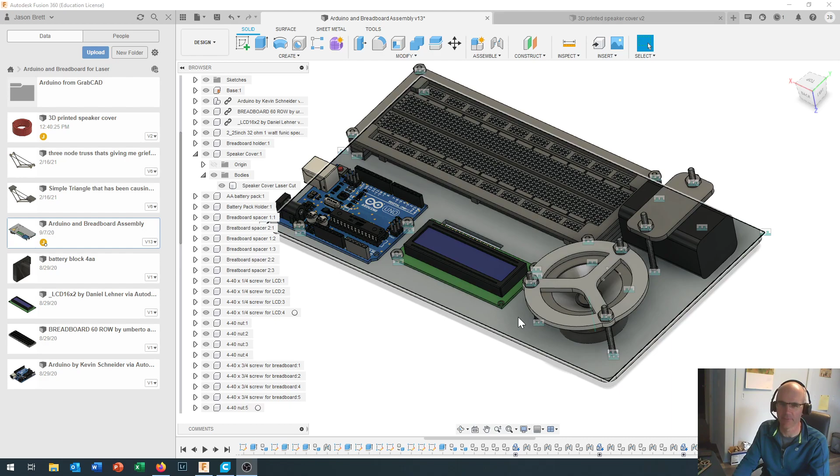And the part we're going to take a look at making today is for our Big Bad Breadboard board. And you can see here that I've got the board all designed in Fusion 360. And right now on your Big Bad Breadboard board, the speaker is held in place by this doohickey right here that I call the speaker cover laser cut. Well, we can turn that part off and then we can come down here and I've designed a 3D printed version that comes down here and surrounds the speaker. So it's going to look a little bit more, here's the real thing right in here.

So you've got a Big Bad Breadboard board and you've been using it for a few things and you can see there's a speaker sitting on it right here. And the speaker actually sounds a lot better if you can enclose that speaker so that you don't get sound reflections bouncing off the bottom of the board and coming back up and interfering with the sound that's supposed to be coming towards your ears.

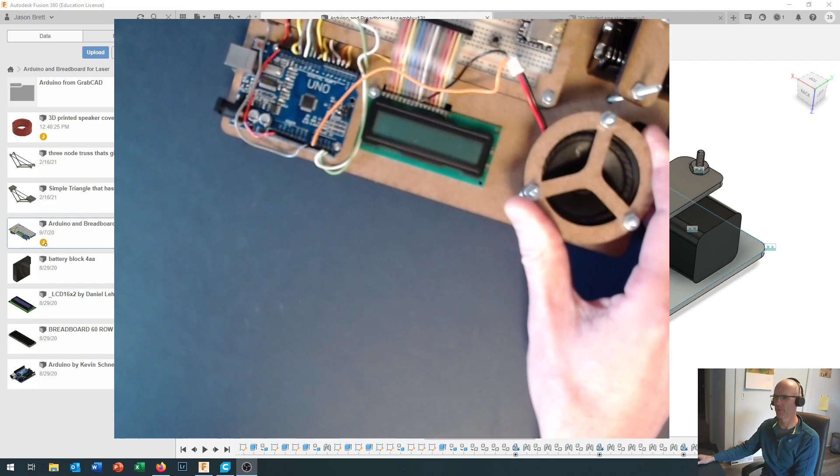So we're going to build a 3D printed part that comes down here and it's going to fit perfectly into our Big Bad Breadboard board, and you're going to replace the laser cut part right here with a nice brightly colored 3D printed part. And in the process, you're going to learn a little bit about modeling a part in Fusion 360 and slicing that part in Ultimaker Cura, two of the software packages that we use pretty regularly at BCIT. Okay, let me turn this back off over here. There we go. So the part's going to come out looking like this red bit right in here.

Before I get into that, I just want to take a moment and talk about some interesting websites that you will be interested in if you're interested in 3D printing. And one of my favorite ones is Shapeways. And not that I do a lot of stuff with Shapeways, but I tend to look to them for inspiration. They've got a really neat business model going on here at Shapeways and sort of a way to think about the impact that 3D printing, or additive manufacturing as it's probably more generally known, is possibly going to have on manufacturing over the next couple of decades.

Because you're able to design parts virtually inside your CAD software, you can have them manufactured and printed anywhere. Doesn't have to be your shop. In fact, you don't have to have a 3D printer in order to do 3D printing. There are companies like Shapeways, many others out there, that have very nice 3D printers, fancier and more expensive than a small startup company would be able to afford for their own. And you can upload your files to them and they will print in a whole range of different materials.

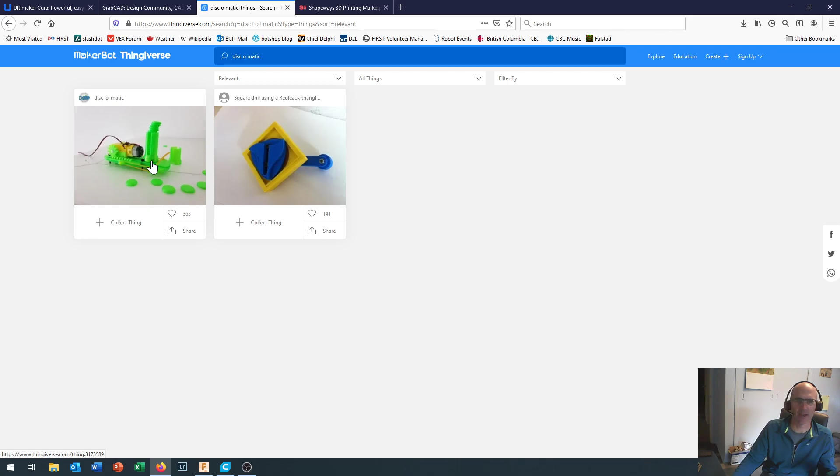So for instance, one of the things that I use on the BoomBot project that we do in second year electronics is a disc cannon, and it's called the Disc-O-Matic. Let's see if that pops up right in here. There we go. And somebody's come and designed the Disc-O-Matic, and they've got pictures of what it looks like. They've mounted it on a little robot, CAD drawings, instructions on how it goes together, and here's all the different files for all the different parts that you need to make that.

So you can come in and you can download the parts, and you can kick that out on your printer. And actually, as I write this, I've got one of these sitting on the Ultimaker in the shop at BCIT right now because I've started to print them out for the second year electronics class. So a couple of neat websites on there. Shapeways, Thingiverse, really cool. You can download things from Thingiverse for free. Just make sure you give people credit. I don't know who Canino is, but I do give him or her credit in my comments, and thank you very much, Canino.

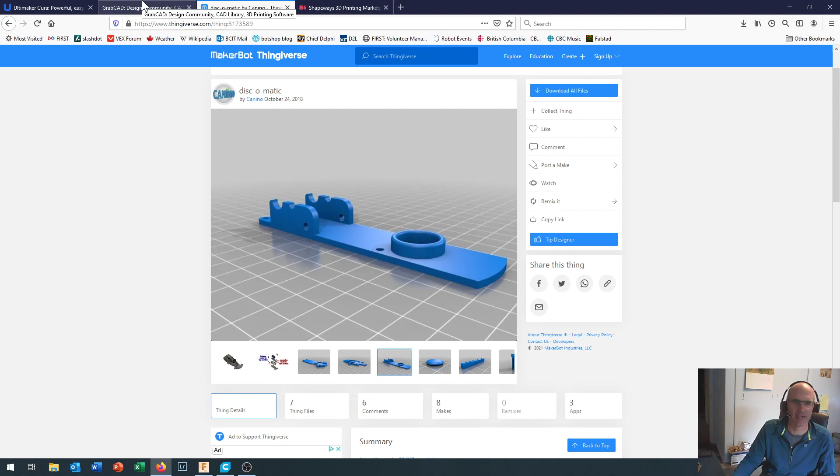And another website I'll just point out along the lines of sharing designs is GrabCAD, because it's got a whole bunch of really nice 3D models available in here. So for instance, if you're interested in doing a 3D model of your Big Bad Breadboard board, and you happen to want an Arduino to drop right in there, you saw I had an Arduino in that design. I have to admit, I did not create that Arduino myself. I came in here and, oh, there's a whole bunch of different Arduino type things. I was looking for an Arduino Uno, and I don't think it was this one that I downloaded and used.

But you can see you can come in here, and again, this is community driven, and everything I've downloaded from here so far has been dimensionally accurate. But people are sharing this, and oh, maybe this was the one that I used. I'd have to go back and look at my files to find out. I usually have the designer's name linked to it, but certainly I didn't go through and design the LCD screen. I did design the battery pack. I did model the speaker, but I downloaded the breadboard and the Arduino from GrabCAD. And if I take a look right in here, there we go. I used the Arduino by Kevin Schneider.

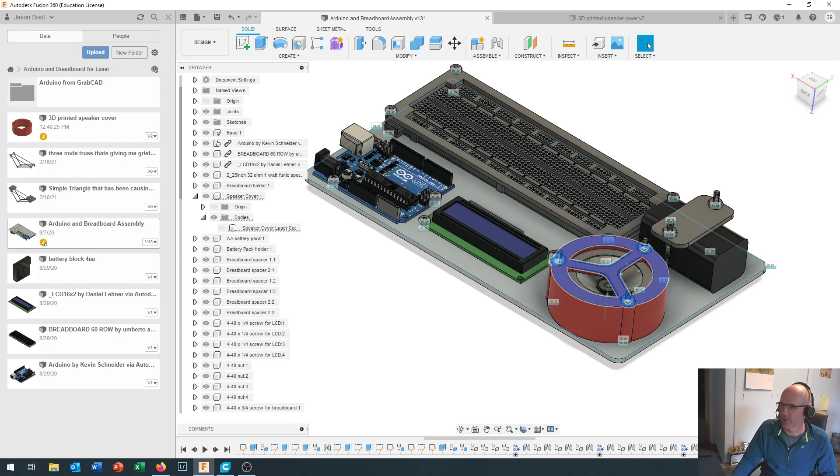All right, let's take a look at what we're going to do to create this design in Fusion 360 and then slice it and print it. Okay, so anytime I go to start a new design, I like to start out with a sketch, and that's not a sketch right there. So at first I made a really quick sketch of what I wanted to create just so that I'd have some dimensions in that handy.

And what I like to say is that when you come into Fusion 360 to make something, yes, it's a drafting tool. Yes, it's a design tool. Yes, once you've got a whole bunch of experience, you can come in here and work in here. But I've been using parametric solid modeling design tools for over a decade now, and I still start with a sketch. And just because that sketch was really ugly, and this presentation is going online, I did come back and do a slightly nicer sketch with my dimensions right in there and used pencil and all that. Probably more detail than I needed to, but I wanted to make sure it was worked out and that I had a reference to start from.

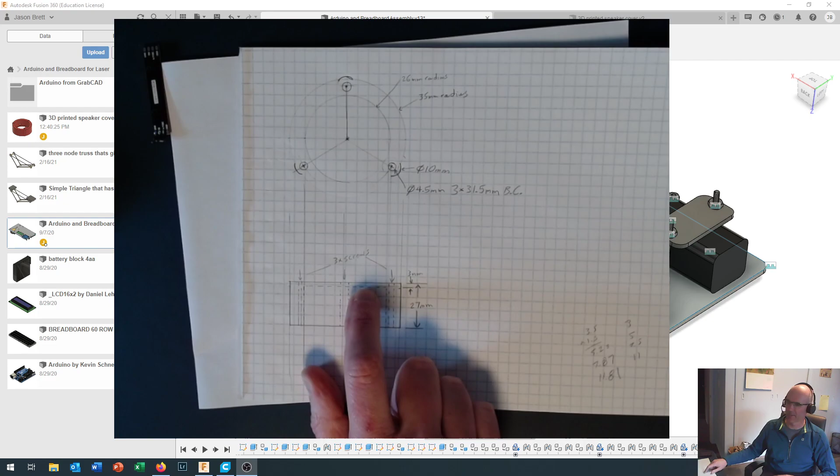You've already kind of seen where we're going, so you've got an idea of what this is going to look like. We're going to have a flat surface on the top right here, and then we're going to extrude it outwards. To keep in with the original design, it's only going to extrude up about 3 millimeters here. We can come back and change that later on. And then it's going to come down a total of 27 millimeters right in there. And that should be just about the right size for fitting our speaker in.

Okay, let's see, where are we going to begin with something like this? So let me turn off that screen. And let's come back to Fusion 360. And I'm just going to switch over here to the speaker cover and make sure I give you a good idea of what we want.

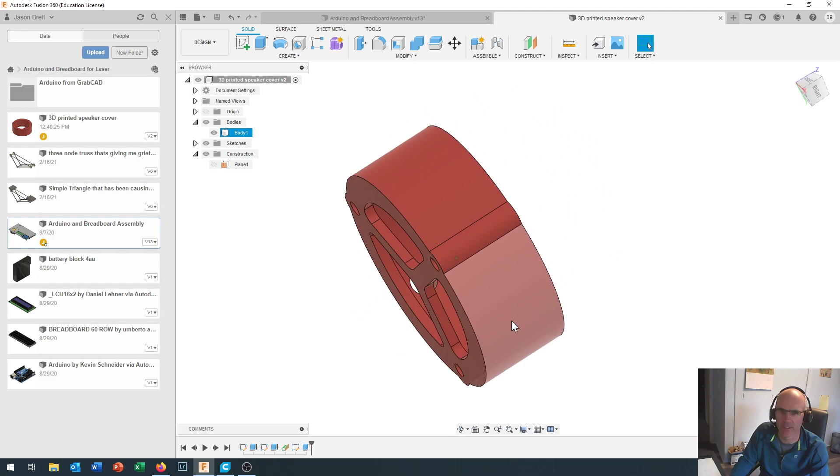Now, when we design this, we've got a few constraints that we have to keep in mind. One, it actually has to be dimensionally accurate, and it has to fit what we're going to make. We've got to have a hole in the side of it for the speaker wires to get out. And then the rest of our Big Bad Breadboard board has 3 holes coming through right like this. And I'm just going to stick pretty much to the laser cut design, but there is room to do a bit of freestyling in here.

Now, when you're thinking about 3D printing, and particularly with our printers that we have in the shop, you have to think about how the printers actually work, because they print with one layer going on top of the other and up higher and higher and higher. So you need to have a relatively large flat surface as your base layer so that you can actually bond to the print plate.

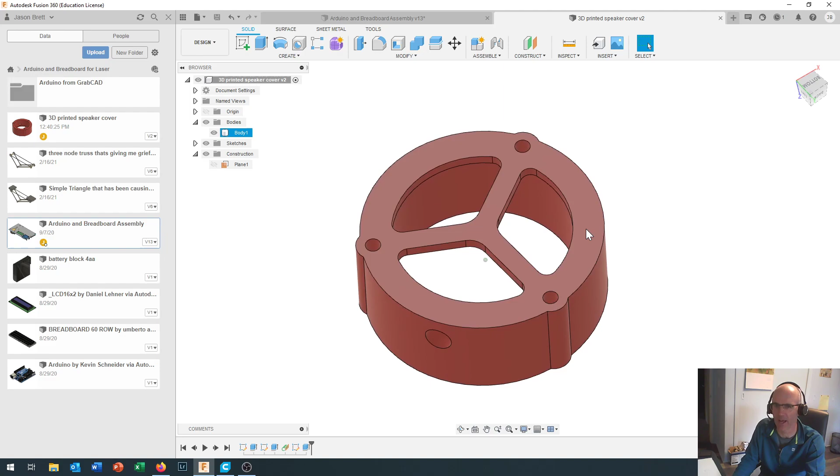Okay, now you've got 2 possible surfaces to have as your flat surface right in here. This could be one right here. So if we keep that flat, then I can print it around this way, and I can start at the bottom and start building up right in here. Or I've got a big flat surface right here, and I could put that surface down and start building up that way. Now the catch is, if I build it up this way, that lets me put all sorts of nice smooth edges and bumps, and I could have a bunch of detail on the top.

But the challenge is going to be these pieces that come into the middle to protect the speaker diaphragm. If I look at that from down below, I'm going to start printing up this way, and this is all going to be hollow in here. And then all of a sudden, I'm going to try to print this face right inside here. And there's going to be no support underneath that. Now, when we get into the 3D printing software, I am going to talk about something called support material, but ideally, we'd like to avoid support material if we can possibly avoid it.

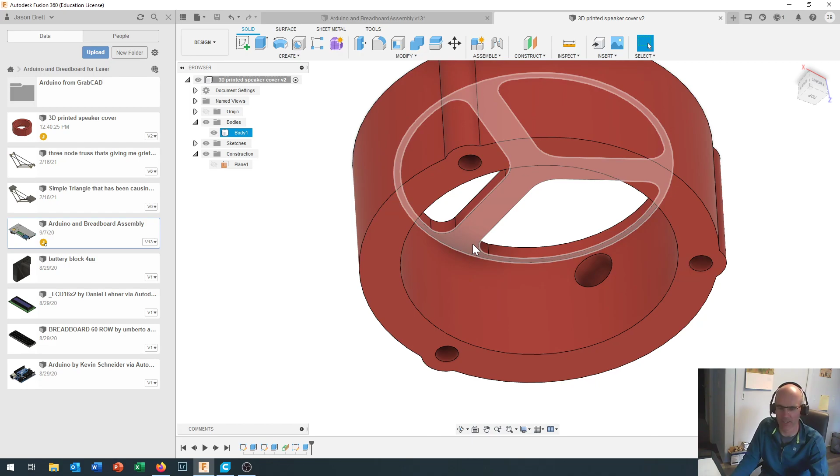So what I'm going to do is I'm going to flip it over, going to put this down this way. This side right here is going to sit right flush on the print bed, and we're going to start building up right around here, and it's going to come out on this side, and it will be beautiful, and it will fit perfectly because we took all our measurements.

Okay, so this is the thing that we're building. The way that we're going to build it is by starting with a sketch on this plane right here to determine the dimensions. Then we are going to extrude that upwards. Okay, now we're only going to extrude it upwards 3 millimeters because we're going to come to that surface right there, and then we're going to use that surface as our reference to extrude the remaining project 24 millimeters to come right up here. Finally, we're going to come back in and we're going to put a hole in the side of it so that our speaker wire can get out.

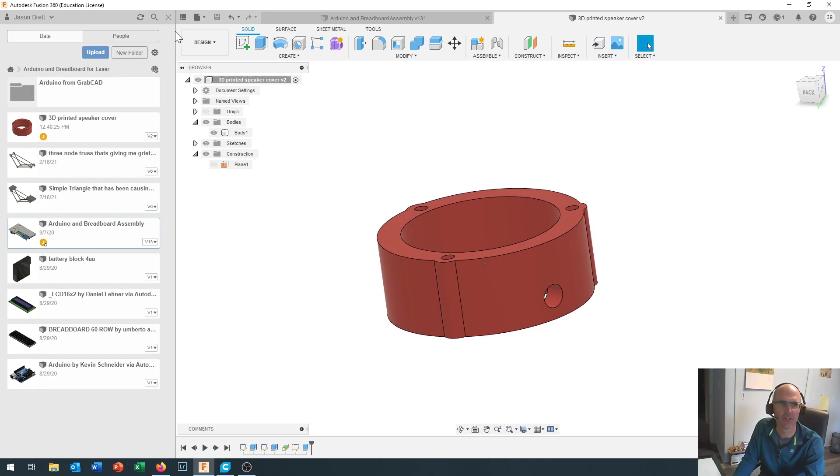Okay, so you've used Fusion 360 a little bit before. This is maybe the first time you're designing a part in it, so I'm going to go through and talk about some of the things as we do that. So you're going to come in here and say, I want a new design. Okay, and you should have a nice blank screen looking something like this.

And along the top, you've got some tools for creating things, modifying things, and later on when we go and put things together for assembling things, but we're not going to need the assemble just yet. A couple of useful tools are Construct. We'll use that for making construction planes because we're working in a 3D space. Not everything is on the X, Y, and Z axis, so sometimes you need to create new axes and planes to serve as reference surfaces.

And then we've got the inspection tools over here, which we can use to take dimensions off something, measure how far apart 2 things are. Lots of useful stuff. And of course, Insert for putting different parts into your drawing. That's how you'd get your GrabCAD materials into your design if you had a multi-part design coming together. We're just going to be creating a single body or a single part or a component, and later on it can go together into the Big Bad Breadboard board, which is an assembly of components.

Okay, you probably don't have all of these files right in here. You might already have some. But let's start out by just saving our file and giving it a name. Let's call it 3D printed speaker cover and then put your name at the end of it. Maybe you don't need a dash in there, okay? Just because if you're sharing the file with me and saying, hey, this isn't working, and you've got your name attached to it, then I know whose file I'm looking at. When you go to 3D print it, you'll want to have your name attached to it as well.

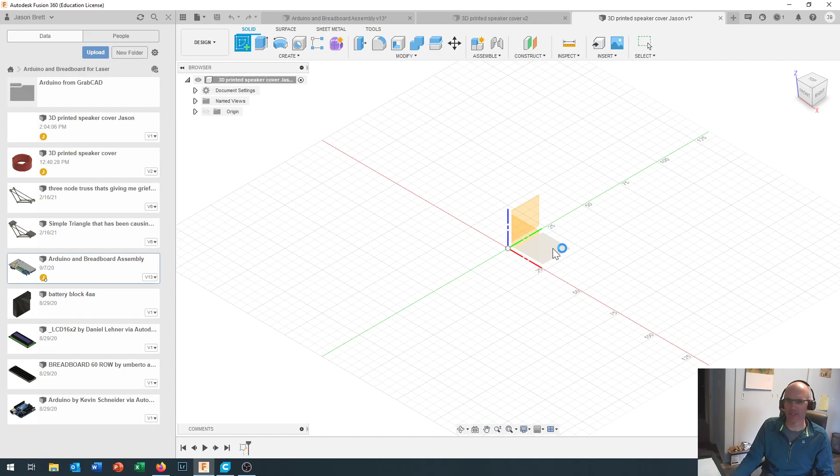But let's start with what we'd call the YX plane down here, okay? Because Z is coming straight up. We're working on the Y and the X. You can see Y is in green and this axis in green. X is in red. This axis is in red over here. And it's got some dimensions worked out right in here.

Now, a couple of things that I should have mentioned before we got going: check in your design when you installed Fusion 360, come up to the top corner, click on here and go to your preferences. And in your preferences, down at the bottom for your default units for your design, just make sure you're working in millimeters. Cura and our 3D printers like to work in millimeters. It's not a big deal if something comes in inches or in centimeters because we can just scale it by a factor of 10 or a factor of 25.4. But anyway, in Fusion, I'll recommend that you set things up in millimeters. And I think that's probably been working for you okay so far.

Weirdly, for our electronics, we're going to work in inches and thousandths of an inch. So yeah, typical Canadian, fluently bilingual in 2 different measurement systems, even though one of those measurement systems is stupid.

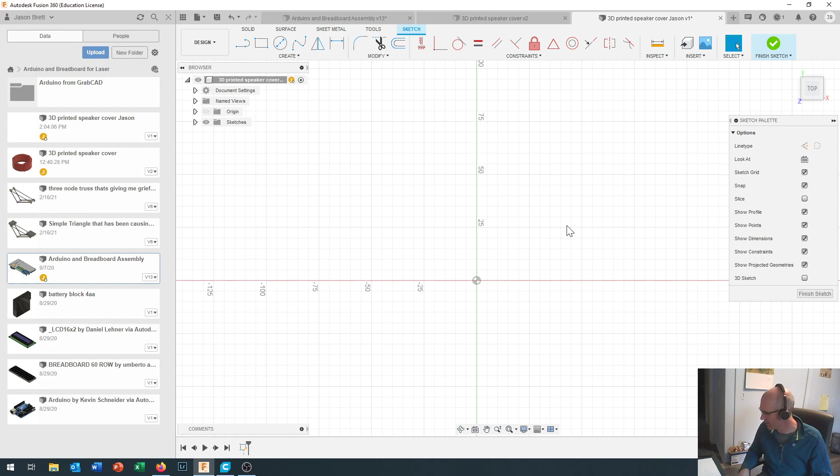Alrighty, let's carry on. We're going to start by taking a look at that sketch that I had laid out, and start with the simplest part of the design, which is going to be the main circle with a 35 millimeter radius. So your circle tool is right up here, and we're going to create a circle. Come down here and just click right on the origin. Doesn't have to be the origin, but it's a nice point of reference. And you can see as we draw that circle out, it's asking us what diameter do you want to make that? So I said it was going to be a 35 millimeter radius. Let's make sure we make that a 70 millimeter diameter circle.

Okay, and it shades it in nice and solid for us. At this point, you may need to zoom in or zoom out.

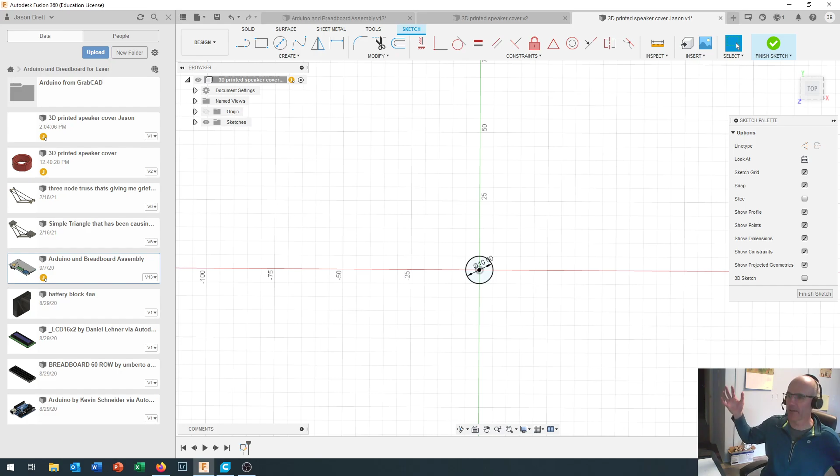Now, this is really cool, very powerful. We've got undo right up here, so let's put that back to 70 where it belongs. Very, very powerful. But part of the challenge when you start designing things in here is that because everything can be changed...

All the parts have to be interlinked to each other using what we call constraints. If you want to get the full benefit of parametric CAD, those parts need to be able to link to each other. Okay, so we've got the outside circle drawn in there. There's going to be a 26 millimeter radius inside circle, which is 52 millimeters in diameter.

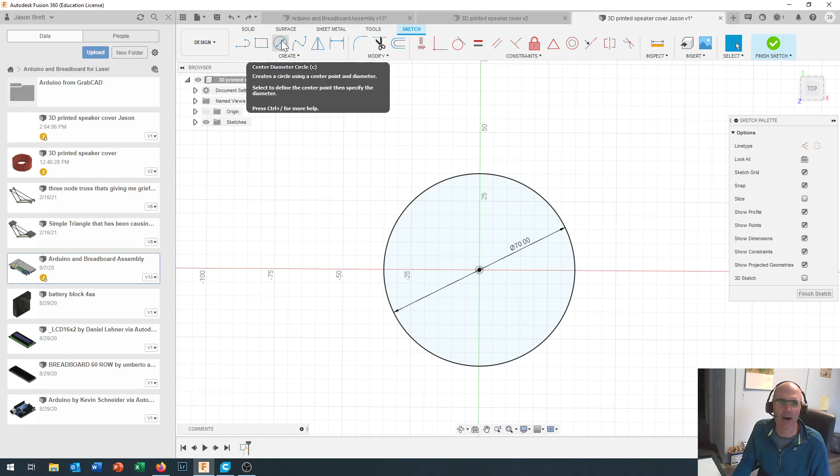Let's create a circle right here, and now you can just type in 52 millimeters in diameter for our inside circle.

Okay, so now you can see that we've got this outside ring coming right along here, and this is laying out the groundwork for our circle. Now we've got 3 bolt holes. One's going to come in right here, one down here, and one over here. Now these spaces are spaced radially and nice and even.

You've probably used a circular array in AutoCAD. We're going to use a similar tool in here. In here, you're going to have to drop down on the menu to find it. They call it a pattern. Okay, but before we can use the pattern, we have to create the parts, and we want to make sure that we've got things in the right position.

So to do that, I'm going to create some construction lines, okay? Everything that we've created so far has been object lines. So now I'm going to come in here and turn on the construction tool, and I'm going to draw a line, starting right at the middle. Make sure that it snaps onto that middle and that it's holding on to the center of that circle.

And then I'm going to come right in here, and you can see I can put it anywhere that I want, but my dimension is highlighted on the side right there. So I am just going to type in that I want those circles to be at a 31.5 millimeter bolt center. So I just go 31.5, okay? And now it puts that dimension in there.

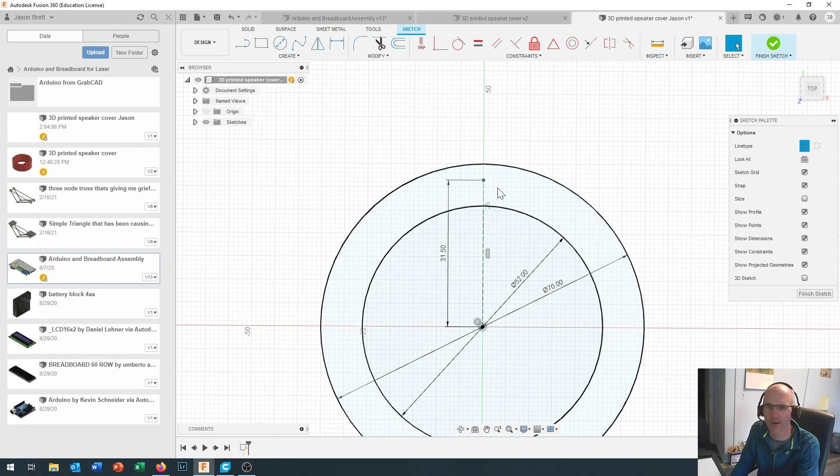Very cool features in there that go through and figure out all the hidden lines and everything for you. All right, so now we've got the location of the center hole for our bolts. I'm going to turn my construction tool off, and I'm going to create a circle. This time I'm going to make sure I snap right onto that center point right there. And it asks, what diameter circle do you want? I want a 4.5 millimeter diameter circle.

Because there's going to be a bolt and a nut over top of that, I want to make sure I've got enough room to support that. I'm going to make that 10 millimeters diameter.

I haven't bothered with any trims or anything just yet. If you're doing this in AutoCAD, you'd be doing all your dimensions at the same time and getting the trim just right. But we're just creating a sketch, so I'm just leaving it like it is.

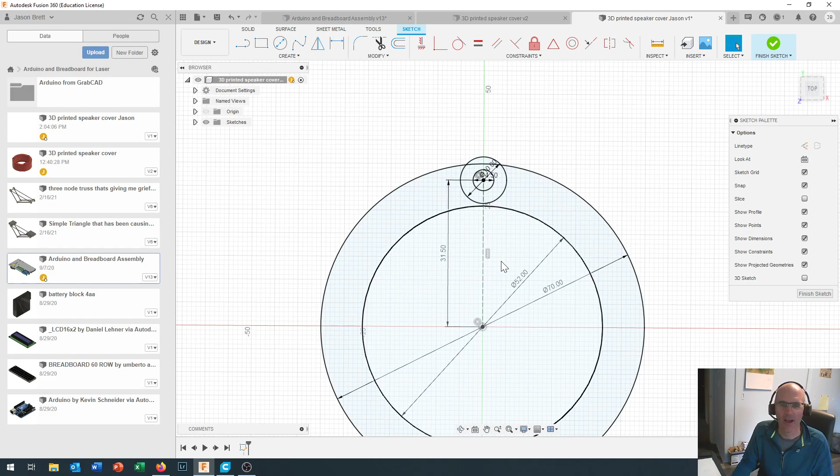Now what I'm going to do is create that circular pattern. You come down here, click on the drop-down menu under Create, and click on Circular Pattern. This gives me a dialog box that tells me to select my objects. So I'm going to select right here, and right here.

Now it's possible that you've clicked on something you didn't mean to. If you clicked on that circle, we don't want that in our pattern, so if you click on it again, that disappears. You can watch up here - it tells you how many objects you've selected. Pretty easy to do.

Once you've selected the objects you want rotated, you need to tell it what it's going to rotate about. Click on Select, and you want them to rotate about there. Beauty, 3 even circles. If you had 4, 5, 6, however many bolt holes you needed, we've got 3, but you can play around with the quantity and it will space them out as you need. Let's just click OK on that.

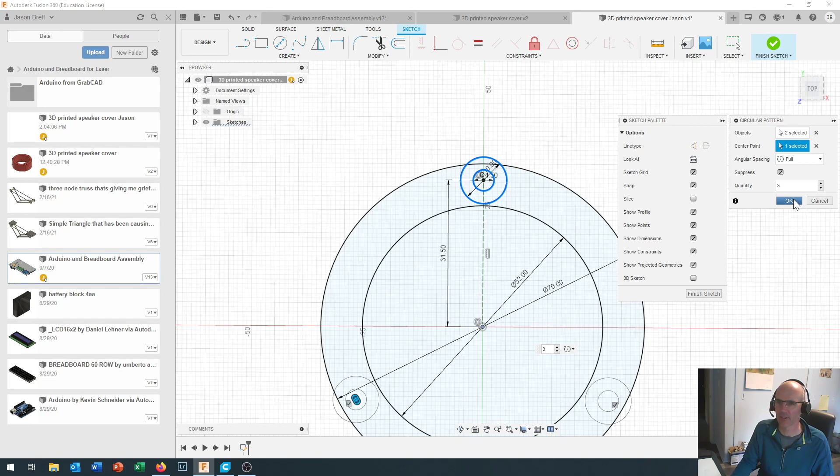And there we go, we've got those in there now. You'll recall from the design that I also had some pieces coming down right in here, sort of a little triangular bit to come out and cover the speaker diaphragm.

Now we can create those a number of different ways, and one of the things I'm going to do is just use the offset tool. Let's come in here - offset is under Modify for some reason, not quite sure why.

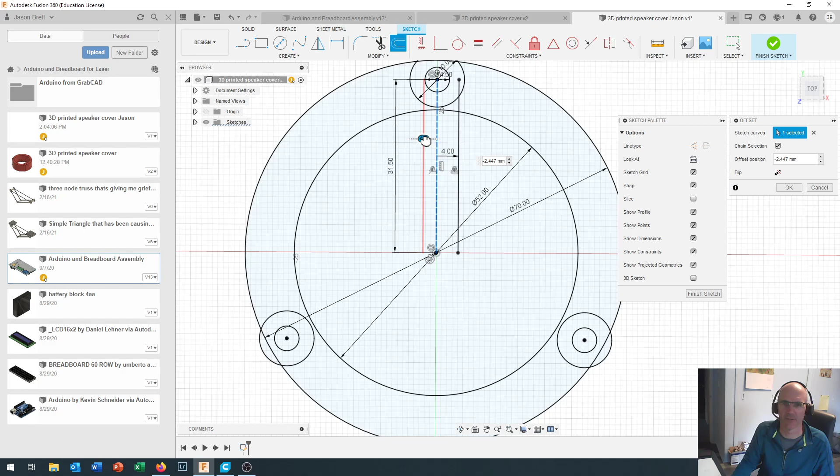I am going to offset the center line and take it off to the side by, I think, 4 millimeters. Then I'll do the offset again. You'll notice the letter O is right next to it - I can just type O to get offset. I'm going to take it in here and drag it off this side, and you can see that changes to a negative because I'm on the opposite side - negative 4 millimeters right there.

Now I've left this sticking out long, but I'm not too worried about that right now because I think you're already familiar with the trim command. So T for trim comes in right here, and I can trim this down - I want to get rid of that bit, that bit, and that bit.

It's giving me little warnings down here saying constraints and dimensions are being removed, but the drawing will still be fine. You can see our constraints actually showing up right in here as little icons - those two bars refer to the parallel constraint right here, and this one refers to a vertical constraint. So we've got these lines constrained to each other.

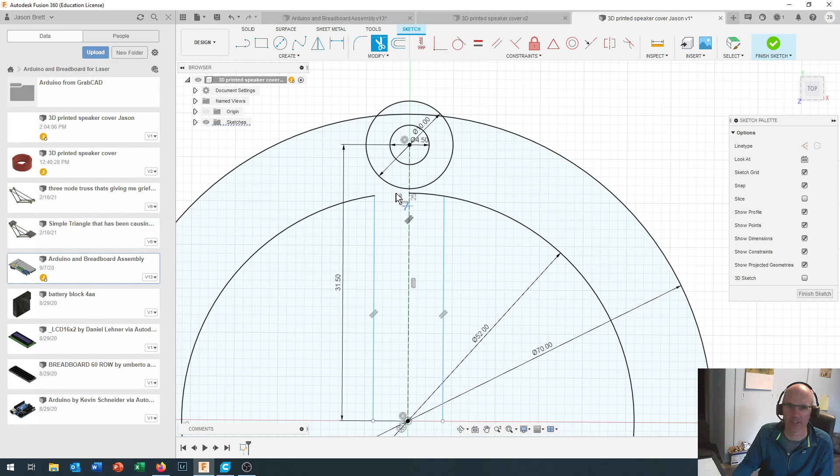As you get into doing more complex drawings, the constraints become more and more important, and I think you'll do a lot more of that when you do your course in parametric solid modeling next year, quite possibly using Inventor, which is a very similar product. Now I just clear those two bits out right there, and after doing all that, I can hit escape to get rid of the trim command.

When I highlight this, you can see I'm highlighting this circle all the way around, and it's got this part coming down here, but nothing joined together in the middle. Well, we want to get 3 of these coming out, and it would be nice if we had nice filleted little corners. So fillet belongs under the modify command.

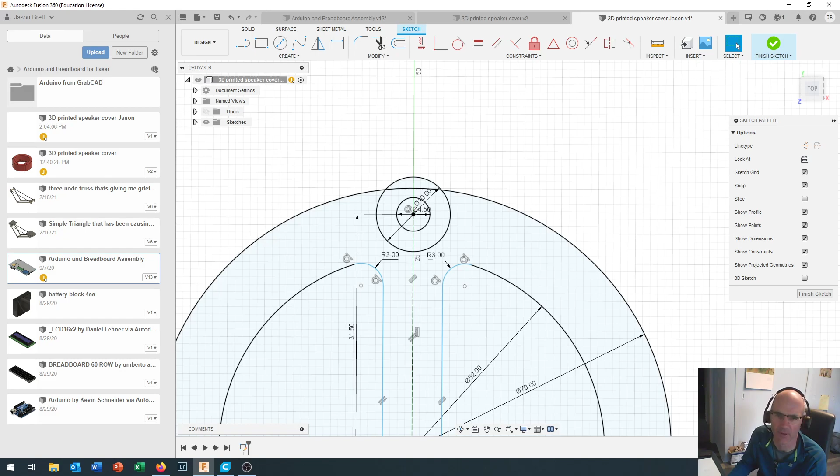You fillet that, and then it asks what radius you want to fillet to. 3 works pretty nice. And then you can fillet this corner right here. Oh, I forgot to select the fillet command - it's like, what do you want me to do? Fillet right there, and 3 millimeters. May as well make it nice and symmetrical.

Okay, now clicking on the middle mouse button allows me to drag that back up onto the screen. Again, you've got tools down here for pan and zoom, and later on we'll use the orbit tool to rotate around and look at things. But right now we're working on the flat here.

Now I'm going to use that circular pattern tool again, and I'm going to create a circular pattern of these parts that I just created. There we go. And it should say 4 selected, okay? Because I've got 2 radiuses and 2 lines.

Okay, now I'm going to select the center point. And there's the center point right there. And it's already got 3 selected. And you can see this all came around and created these lines for me. And those look like they're all in the right place, so we'll hit OK.

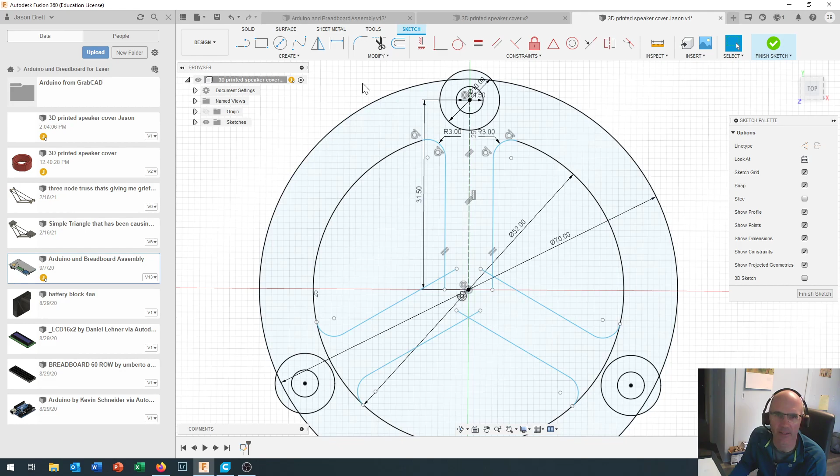Let's come back. We could just leave it there, but let's tidy it up a little bit with some filleting on the middle. And 5 mm looks like a nice fillet there. And fillet. And fillet. There we go, it's looking pretty good.

Okay, and yes, we've got lines overlapping over top of each other. Yes, we've got dimensions everywhere. That's the brilliance of parametric solid modeling. Watch what happens, for instance, if this 52 dimension is wrong.

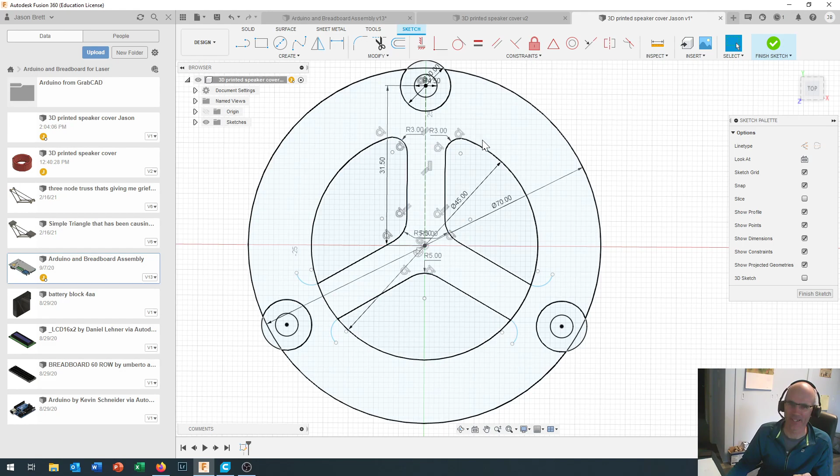Okay, now if I've got my parameters set up right, I should be able to say let's bring that down to 45. And the first one changed, but the second one down here didn't change. Okay, well that makes sense - we'd have to go back and redo our design.

Because the constraints didn't modify over with that. But had we set them all up with the constraints all tied in there and then gone through and added the right constraints, we could take this design and scale it up and down and twist it and make it fit, and it would keep all of the design intent. Design intent's a big word in parametric CAD that we had originally intended for it.

Okay, let's go ahead and turn this into a solid part. We have our sketch all done right now. I'm just using my mouse to move it around and show you that it's nice and flat. It's only two-dimensional right now.

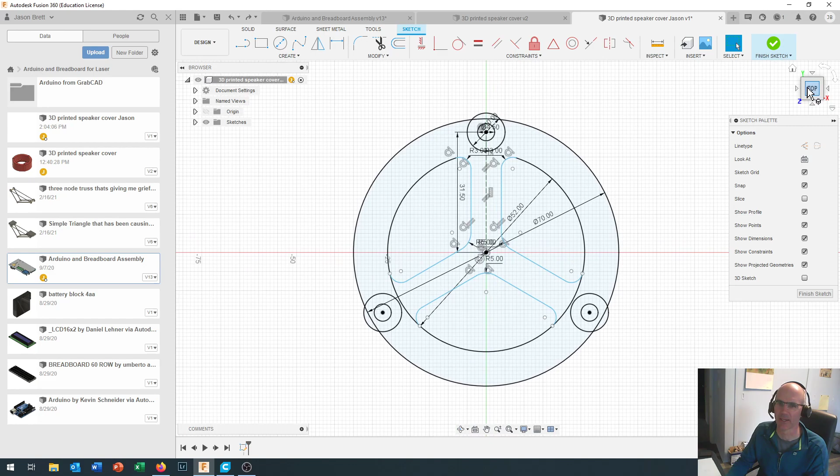Okay, if you wanted to move that around, you can come up here and grab on the box in the top corner and you can pivot that around, or you can just click on one of the planes and take a look at it from a particular plane.

I'm going to click now on Finish Sketch, and then I'm going to come up to the top right here and say I want to take a look at it from this corner right up here. So I just clicked on that corner and it rotated so I had more of an isometric view of what I'm looking at. Now, once you've got a sketch created, the trick to Fusion 360 is then you take that sketch and you extrude it.

And just like squeezing toothpaste out of your toothpaste tube, the extrude function comes in here and says, okay, select your surfaces. So if I select that surface right there - now you have to be careful about which surfaces you select, because if you forget a surface, it's not going to get extruded.

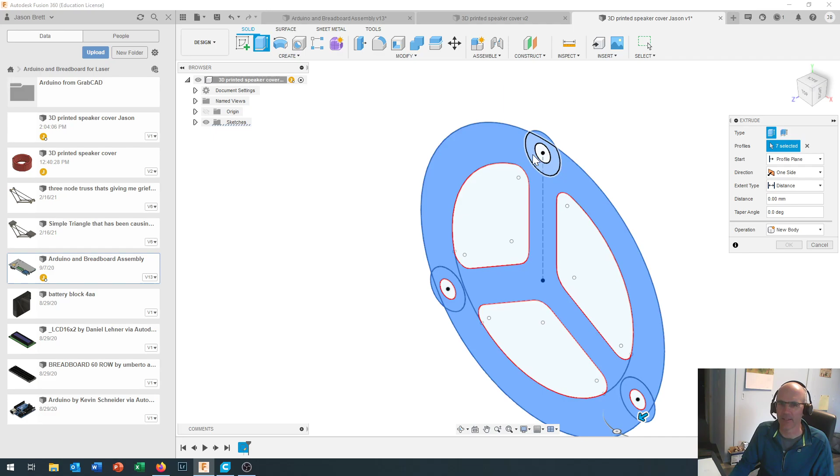Now, you'll see I've intentionally not selected these surfaces right here and this surface right here, because those are going to be holes and they're going to be open. Okay, and so when it looks like that, now we're ready to do an extrude. And this is the part that's going to go up on top of the speaker.

Now, right now I've got it set to 3 mm. Doesn't have to be 3, but 3 should give it sufficient rigidity to hold everything together and to protect the diaphragm. So let's tell it we're going to extrude that by 3 mm. And now you see that extrudes it right out of that plane.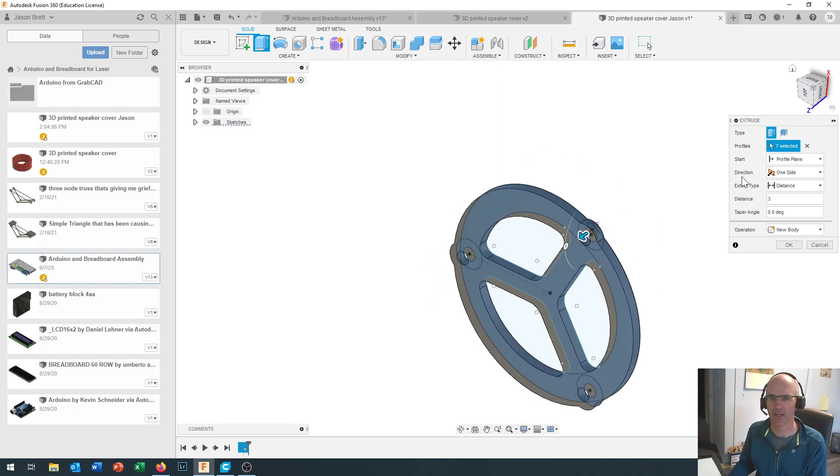And you can come up here on the top and you can rotate around to view it from different points of view. I'm just going to use my mouse to zip it around. Yikes. Turn around the way I want you to go. There we go. And you can see extruding 3 mm out there. And it's going to create that as a new body. And I'm just going to click OK. And there we go. So you've got a nice solid 3D part.

And quite frankly, we could take that right now. We could send it to Cura and slice that up, and we've got a part that we can model with. And the cool thing is, over on this side of the screen, we've got a list of our sketches, and that was drawn up as sketch 1. Okay, that was our original profile. You can click on that, and you can go back and you could edit that sketch.

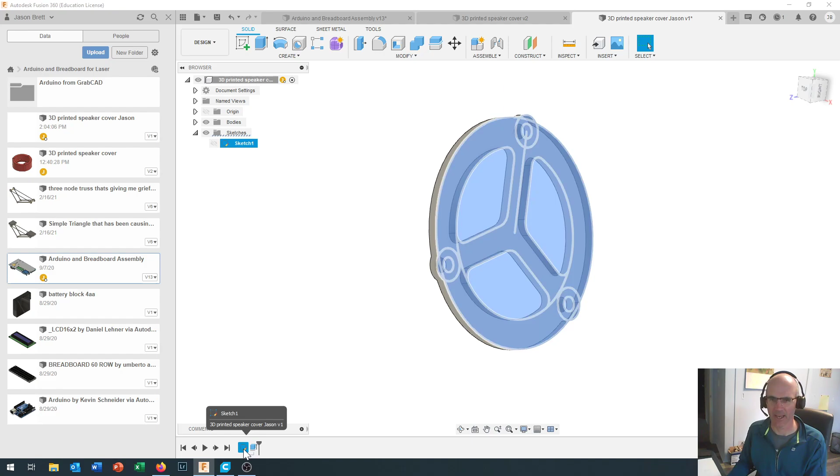And so if I came in and edited that sketch right now, all of the changes that I made when I edited that sketch would be reflected in the extrusion that I just did with it. So you can come back and you can modify all sorts of things. We're not going to do anything like that.

Now we're going to extrude the rest of the drawing. Okay, so the rest of the part, I'm going to create a sketch right here. So this create sketch command, you get very familiar with it in Fusion 360. And instead of selecting one of the existing planes, okay, the X, Y, or Z plane, I'm going to click on this work face right here. And you can see how the work face highlights. And I'm going to build right on top of that.

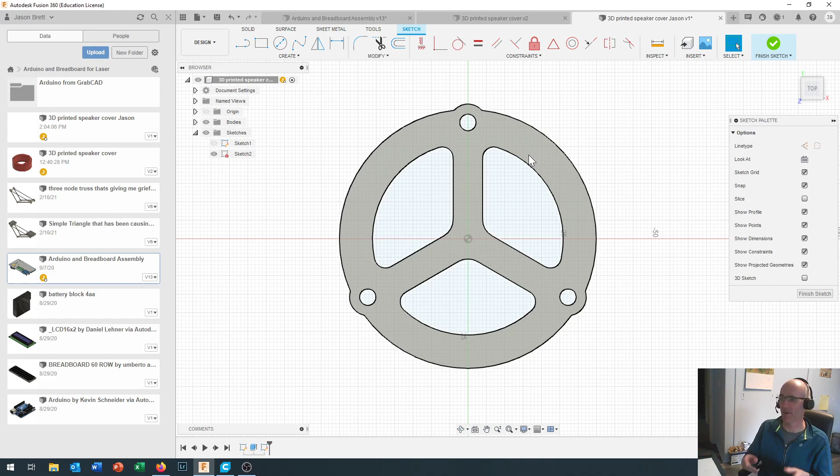Now I'm just going to recenter this on my screen a little bit. Okay, and so I'm working right on top of that surface. So if I extrude out from there, then my new surface will be coming out from that side. Now, I've already done a lot of work to create this the way I want. So what I'm going to do is I'm going to project all of this information onto my new sketch plane. This is a super powerful tool that, after you use it for a while, you can think about all the different neat things that you can do with it.

And what project basically does is it says, I've got a work plane right here, and I've got an object over here, and I want to get the outline of that object as it projects onto that plane. So I take this and I project it right onto there, and it's like it gives me a two-dimensional drawing of this object that kind of exists in the background. And you could choose that for any work plane.

So for instance, if you had an angled work plane, okay, coming in like that, and you want to know how that coffee cup projected onto the work plane right up there, it would project it onto the work plane for you. It's really an amazing and useful tool. So I am going to hit P for project, or you can find it under Create, Project/Include. Okay, we're going to project.

And when I click on there, you see all those lines go red. Now, all of those lines automatically become part of my sketch. And that makes it really easy for me to figure out what I want to do next, because the only other line that I need, I think I'm going to make the part that extrudes be just a little bit thinner in the wall. So I'm going to come out right here and I'm just going to draw a line right on here. Now, I'm not worrying about the dimension.

Okay, just make sure that when you put it in here, that there's no really obvious constraints appearing on it. Just go ahead and click it in right there. And now I'm going to come back and I'm going to do a sketch dimension. I'm going to click on that line. I'm going to click on that line. And it says, where do you want me to put the dimension information? We'll put it right here.

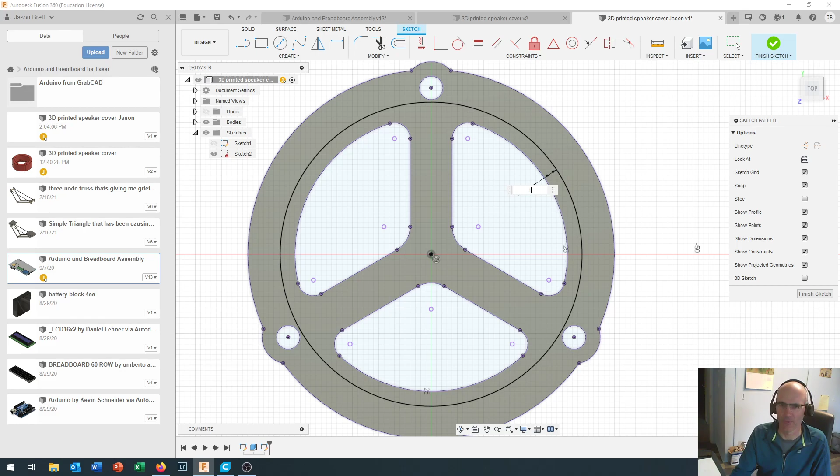And I want that to be 1 millimeter in, just because I can. Okay, just going to space that out just a little bit, make this wall just a little bit thinner, have a little bit of a rim or an edge right on the top right there. Okay, so that is a 1 millimeter gap right in there. You could probably get away with making a 2 millimeter gap.

That's all we have to do for this sketch. We've got all the rest of the information that we need. I'm going to click on Finish Sketch right here. And again, I'll take a look at it from more of a perspective point of view so you can see that the sketch is drawn on this surface right here. When I put my mouse over top of this face, it highlights. So you can see right in there, that face means that I've got one solid continuous face with everything all joined together nicely, which means that's a super candidate for extrude.

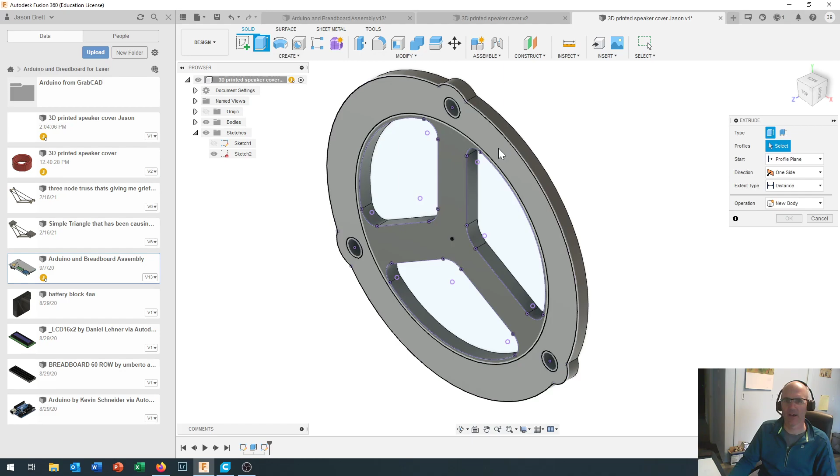Okay, I click on my extrude button and I click on that and I tell it that I want to extrude that a distance of 24 millimeters. And you can see I've got options in here like join and cut and intersection or new body. I'm going to join this to my already existing body. And so now, as I go and do that, there's that little 1 millimeter edge that I left right in there. And you can see that these holes got projected all the way through. Okay, and when you mouse over them, you can see the holes are projected all the way through. And my entire part is looking pretty good.

I can now come in, I can do an inspect. Okay, it's got a measurement tool. I'm going to select this face right here. Then I'm going to rotate around over here to this face right here, and it tells me it's going to be 27 millimeters from top to bottom, which is exactly what I want it to be. Now, it's hard to go wrong when you're going 3 millimeters and 24 millimeters. That better add up to 27.

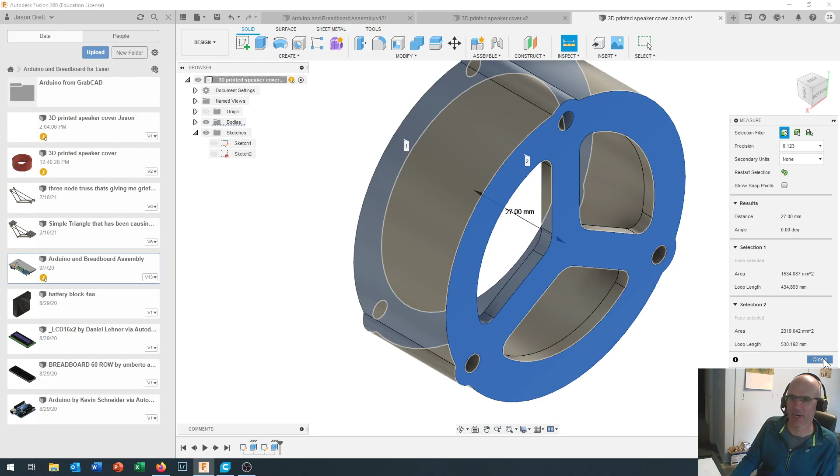But when you're doing more complex drawings and you're trying to check and see, well, what's my spacing between this part and this part? It's a really useful tool to know that that's there for you to measure. And it gives you a lot more information about that too. But anyway, so there we go. We now have a part designed in Fusion 360. Now you can do a couple of other little neat things to it.

For instance, this is going to be a pretty sharp edge right up around the corner. You can actually do a fillet in 3D, and you can come in here and you can click these edges right around here. And sometimes it'll automatically draw the loop for you. Sometimes it won't. There's different options on here on making that. And right in here, we could give it a 1 mm radius just to curve that in a little bit right there. Okay. You'll see when we do our slicing for it that there's a reason I'm not going too much more than 1 mm. But 1 mm around there is not too bad. It just takes any sharp edges off right there.

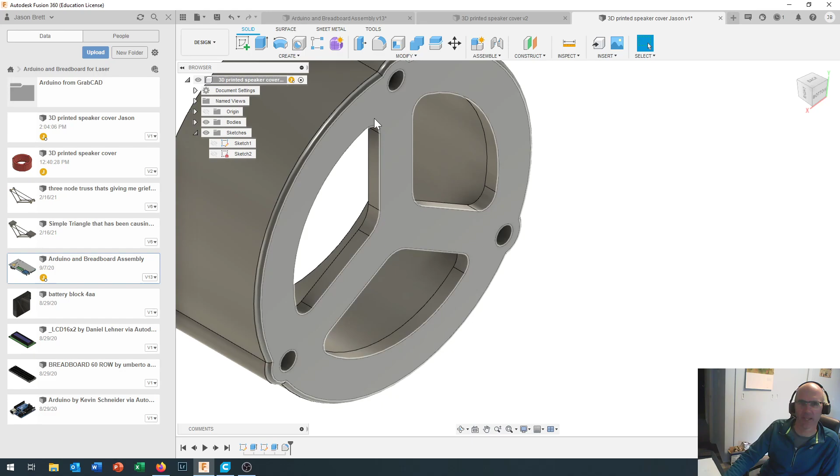In fact, if you wanted, I'll just click OK right now. You could probably come in and put a fillet around this edge running around the inside too. And again, keep it pretty small. 1 mm shouldn't be a problem at all, but that just rounds off that edge a little bit for you nicely.

Okay, so now we've got a part right here and you can rotate through it. You can look at different surfaces. You can click and spin right up there. The orbit command down here also lets you rotate around and see things right in there. And the pan command lets you move things. The look at command is sometimes useful because if you want to look at a particular face, you can click on it like that. Or if you've got a 3D mouse, you just play around and have fun.

We've got one last thing left to do. Okay, this works great. That'll fit beautifully onto our board right like that. The speaker should fit underneath it. We checked the dimensions. They're all good. If you want to double check, you can take measurements with your calipers directly off your Big Bad Breadboard board. But we still need to get a hole for the speaker wire to come out of here.

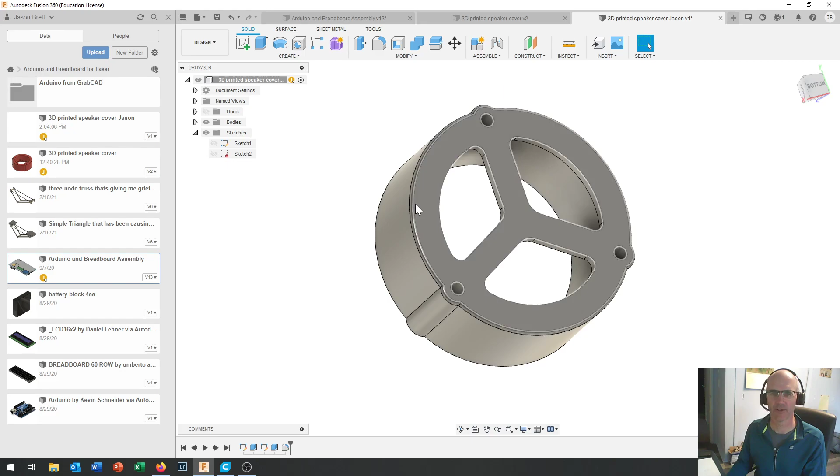And I want to put a hole sort of directly opposite this hole right here, and I want it to be on that face. Now, one of the problems with putting a hole on a rounded face is it's really hard to find reference points, okay? Because if you're going to dimension something, you've got to give it a reference point. And Fusion 360 needs those reference points. You can't just come along and say, put a hole here, okay? Because Fusion 360 will say, put a hole where? And it wants to know exactly where that hole is going to go.

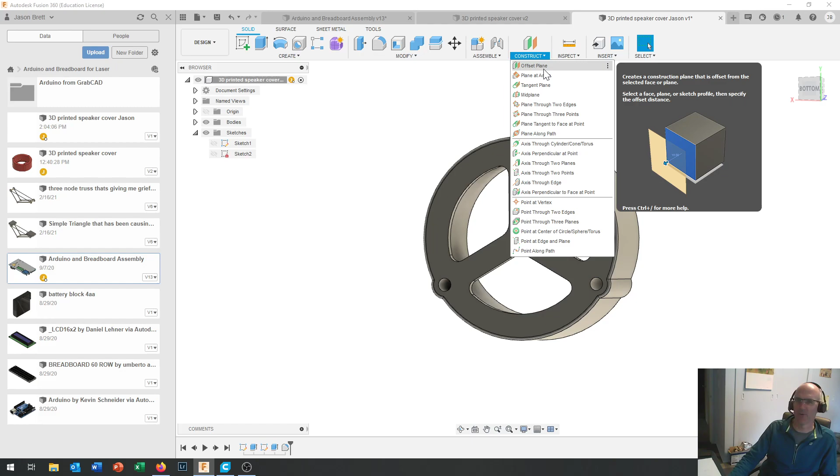So to help it out a little bit, what we're going to do is create a construction plane. Now, as we've been doing all along, we started out using the X, Y, and Z planes to get started. Then we used an existing plane of the first part that we'd created to draw the second part of the object. Well, now we've got all these different options on how we can create planes. And not only can we create planes, but we can create axes and we can create points. The combination of planes, axes, and points, these virtual construction things, allow you to locate parts on your drawing where you want things to happen.

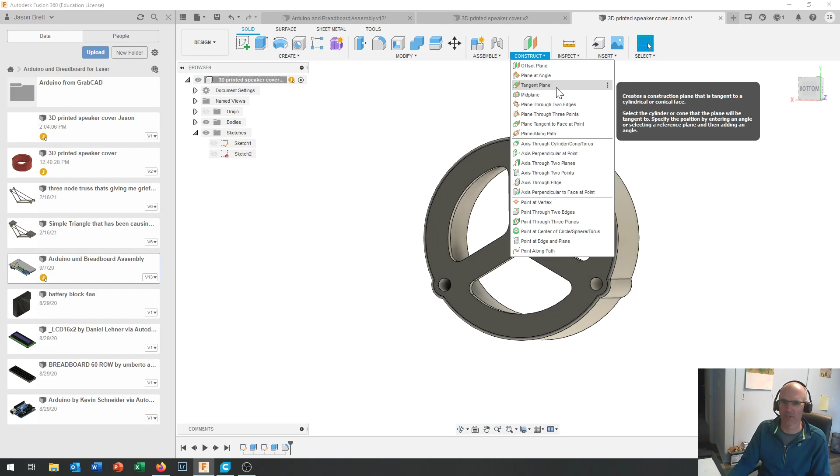Okay, so the most useful one for us right now is we want to create a plane. And because we're working with a cylinder, a tangent plane will be really good. There's a couple of different ways we could go about doing this, but the tangent plane is going to be our most efficient. So we're going to create a tangent plane, and it doesn't really matter which surface I choose to make it tangent on, so long as I pick one of the three surfaces. I'm going to pick this one right here because it's visible right now. And so I select that plane.

Now, you'll see that I've got one face selected. And it's assuming that I want that plane to be vertical, but it also needs a reference plane before it can create that. For a reference plane, I can select any existing plane. So I am going to select for a reference plane this face right down in here. Okay, and this all came up red. It doesn't like that for some reason. It worked beautifully the first time I tried it.

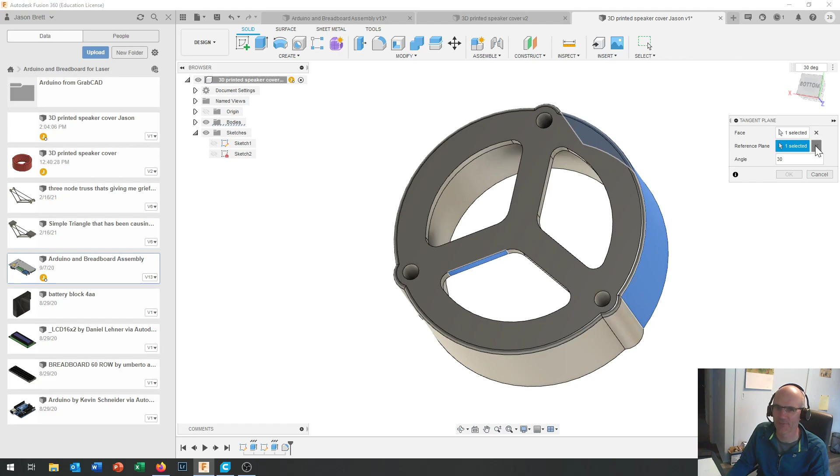Let's try changing how many degrees we're at right in here. Now it's giving me an error, not a problem. Let's take a look and just say, give me a little more info on that. Now it's just saying, that doesn't work at all, you idiot. Okay, so that's all right. Click on X for your reference plane. We don't necessarily need that to be our reference plane right there.

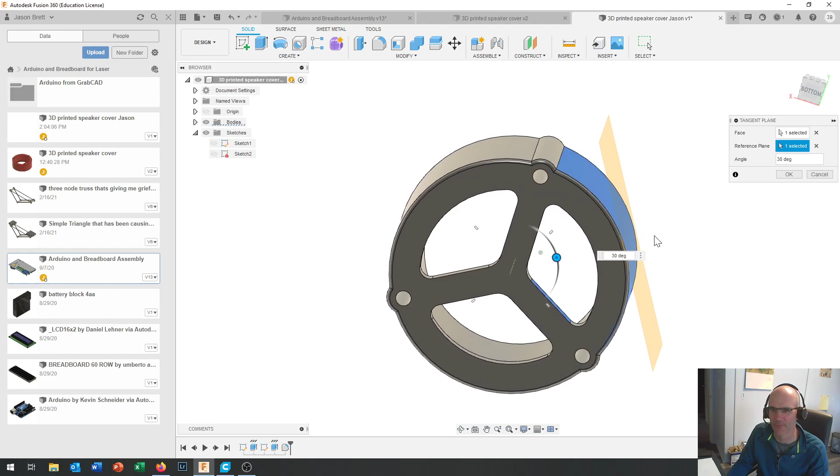And now I'm just like, what plane did I use when I was practicing this drawing so it would all come together nice and easily for you? Did I choose that plane? There we go. It was the plane on the same inside right there. I guess the issue with that one was that if it came right through, it didn't intersect with a tangent. Whereas this one, if I take this plane and come right through there, it will find a tangent point right there. And we give it an angle of 30 degrees. And if we look at that from the top, that's going to come straight through and over to that side. Very nice.

Okay, click OK. Now we've got a reference plane sitting right on here, located on the outside face right here. And it is at a nice straight line that would burrow right through there if we asked it to. We've got a couple different things that we could do. We could create a sketch. We can do all sorts of different things on here.

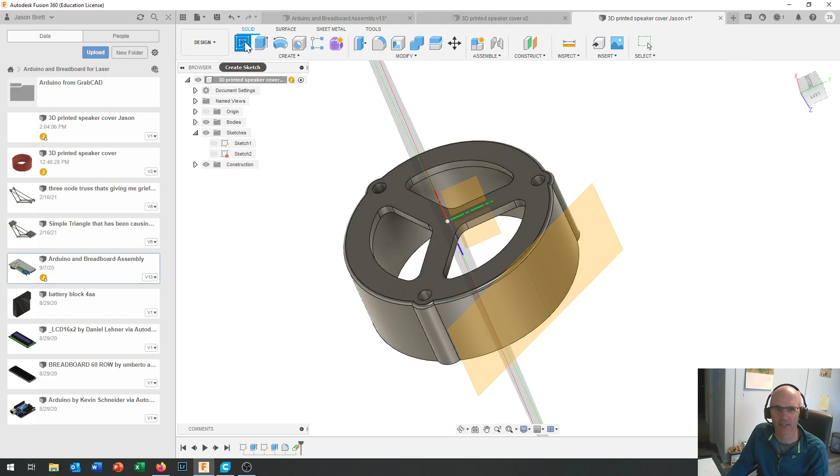There is a hole command that you can use, but we're going to show you how you can use a sketch to create the hole. So I click on Create Sketch, and now I click on this reference plane. This is the new plane that I want to draw on, and it whips the drawing around right like that.

Okay, now keep in mind that there is stuff inside, so we might want to do a projection. We're going to take a projection and just take a look right up here and project this inside surface right here onto that plane. Okay, and now if I go back to looking, oh, I need to look at the exact plane. Okay, I lost my dimensions on here.

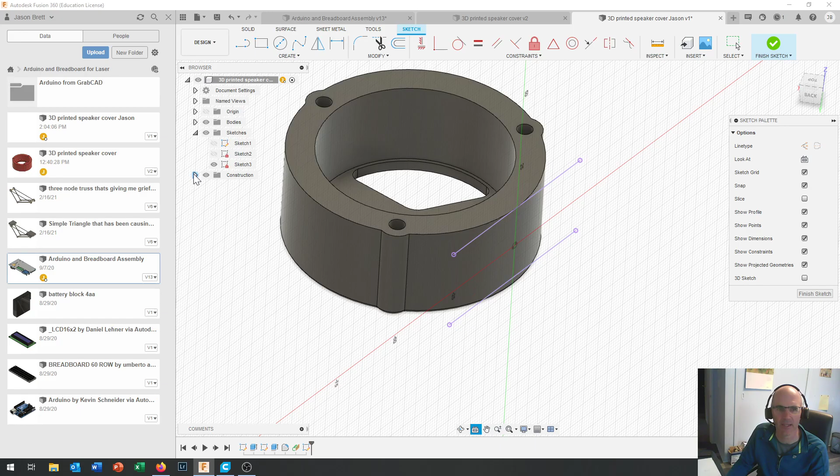Remember I said there was a look at command down right here? You can tell it look at, and if you can't select the plane right there, you can find the planes under the construction heading over here and tell it to look at plane 1. It brings it back into this dimension right here. And now you can see that our projection of the interior dimensions right here includes this line. This is our 3mm gap coming up right here.

Okay, now what we're going to do is create a center diameter circle, and I'm going to put it somewhere up and down on this center axis right here. It needs to be 8mm in diameter for us to fit the little plug from our speaker through. Now, if you want to get fancy, you can measure that out. You could actually make this a rectangular hole coming through on the side because it is a rectangular plug. But for the sake of keeping it simple on today's drawing, let's just make it round.

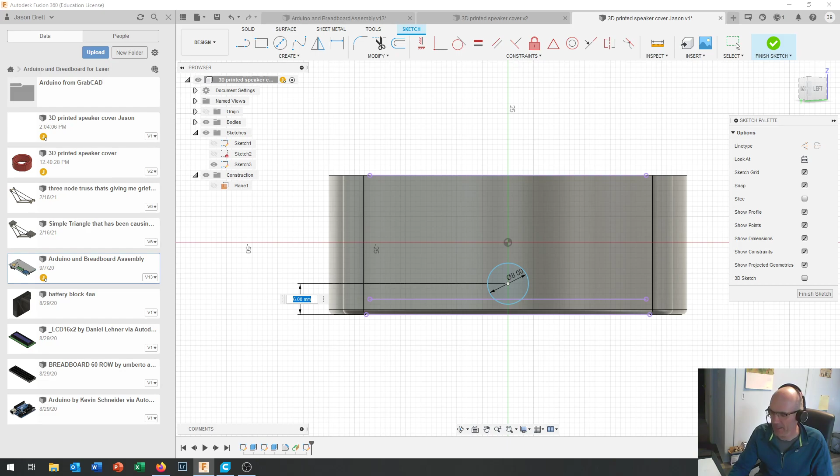And now we have to move that off. You see that intersects right there. I don't like that dimension. We can come in here and apply a dimension to it. So long as it's not otherwise constrained, I can say, well, take the center right there. I clicked on that, and now come down here and click on this edge right here. And it says, where would you like that center to be? And I can say I'd like that to be 8mm up from right there, so it clears that lip right on the inside edge. Okay, so now we've got this hole right here, and I'm going to say finish my sketch.

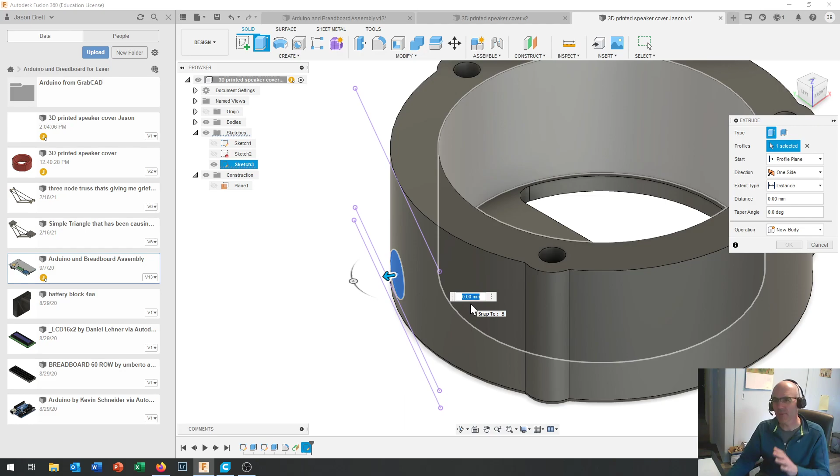Now if I look at that from this corner of the diagram, you can see that this is sitting very, very flat. It's not projected onto this surface. There are tools that allow you to do that, but we don't need to because we're going to do an extrude. Normally when we've done our extrudes, we've extruded in the positive dimension, the equivalent of dragging on that and pulling it out that way. But you can drag on that arrow and pull it back that way, and you can see that as soon as it starts going back inside, in the operation setting right here, I've got new body, I've got join, I come this way, and now all of a sudden it says cut.

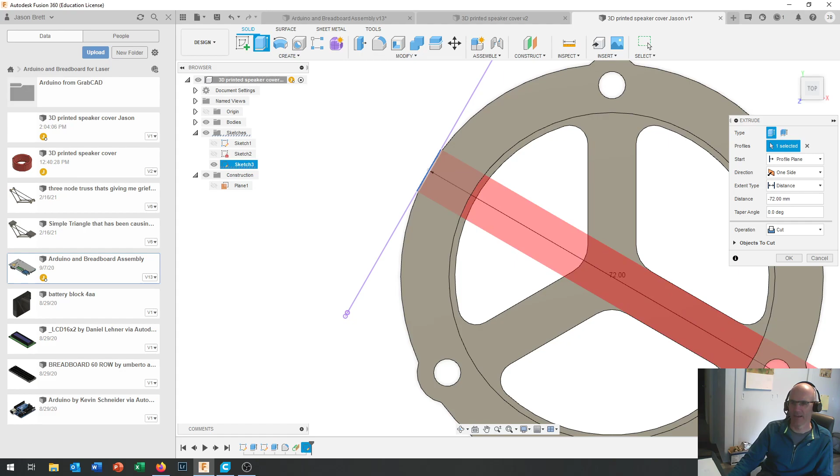And if I go all the way through, let me look at that from the top. Make sure you go all the way through. 11 millimeters should be more than sufficient. If you go too far and come out this side, that hole just keeps projecting all the way through, and you can see that it burrows through on this side of the drawing too. We don't need two holes for our speaker wire to get out, so we're just going to put the one right on here. And oh, it looks like 10 millimeters was enough. The cut option is exactly what we want, and we will say OK.

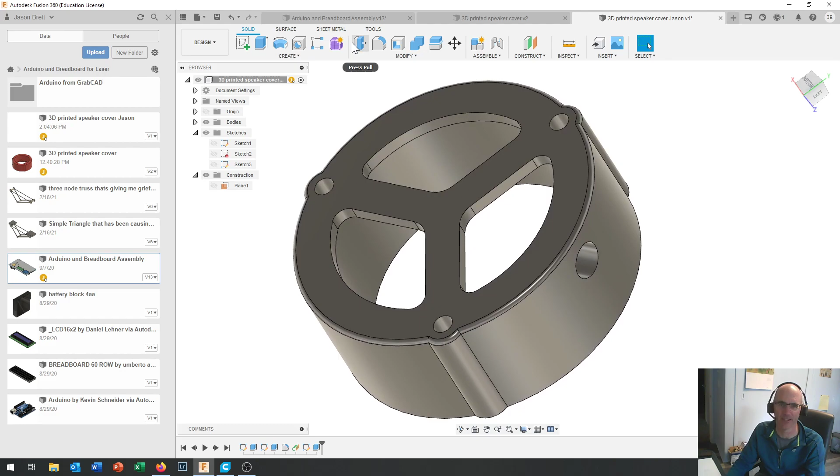And now you've got a hole coming through on that side. As you take a look at it, you can see it from the inside too. So a couple of different ways that you can put things together. Now, since you've got wires coming through the hole, if you want to get fancy and you like using that fillet tool, because I really like filleting and 3D printing is one of the few machining processes where there is no cost to putting a fillet on something.

Okay, so now I selected, what does it say, 3 edges? Thought I'd only selected 2. Let's see what happens when I put a 2 millimeter radius on it. There we go. I've got a nicely filleted hole so that there won't be any rough edges to abrade the wires that come through.

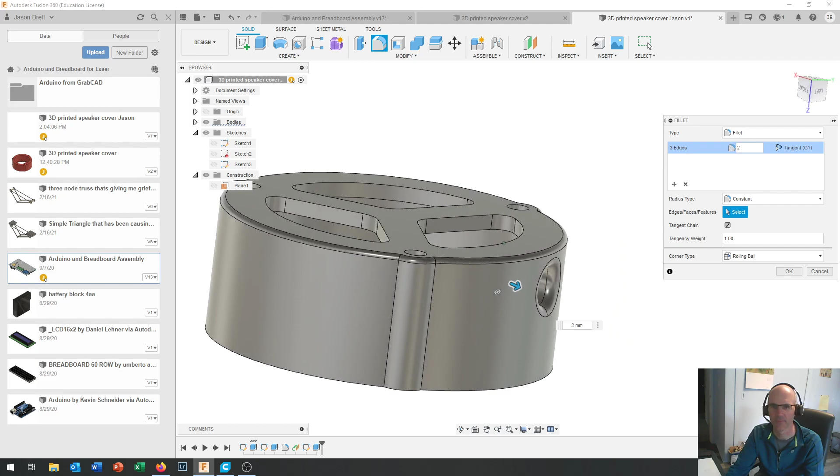Let's just check right up and inside here. Now you can see, oh, maybe 2 millimeters was a bit too much because we only gave a 1 millimeter difference right on there. Let's bring that back down to 1. There we go. Now it meets up nicely with that surface right there.

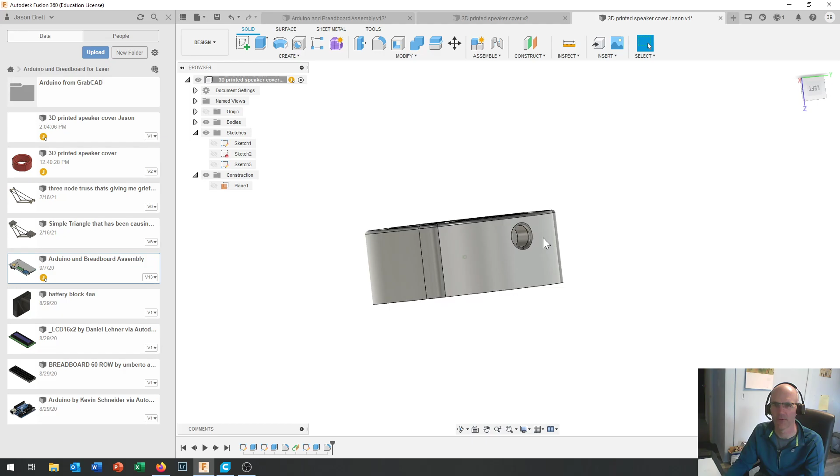And I'm leaving that flat because that's sort of where the rim of the speaker is going to be. This is going to sit down over top of your speaker and hold it all in place. And we should be able to click OK. And now we've got a part with a hole in the side that we can send out to the 3D printer for manufacture.

Okay, so let's save that. And you should see it showing up right over here. And once that's saved, we now need to get that out of Fusion 360 so we can slice it up in Cura. So it's saved in here, and you'll notice it updated the version number. You can always go back to a previous version of your projects in Fusion 360. It's really helpful that way.

Okay, what I want to do is I want to come into my tools. So in the tools menu right up here at the top, you'll notice that my menu items changed. There is a make setting, okay? And what I am going to do is I am going to go to 3D print. And it says, what objects do I want to 3D print? So I have to make a selection. So I select the part that I just designed.

And now you can see it's come through and it's created it in a wireframe. The STL format that we're going to be using uses a wireframe to explain all the dimensions. This is part of the reason why if you download a project from Thingiverse or something like that and bring it into Fusion 360, it can be a royal pain in the butt to edit. That's because it's not a parametric drawing. It's a go from this point to this point to this point to this point type

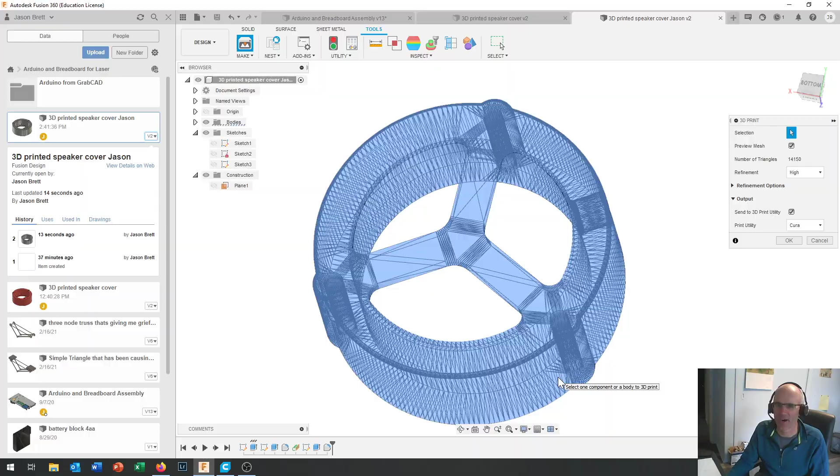of drawing. And so it works, you can edit it, but you don't have all the nice reference points because it's not a logical explanation of it. It's just a physical representation of the part that you're going to make. Still, the STL format is hugely interchangeable, which makes it very worthwhile using.

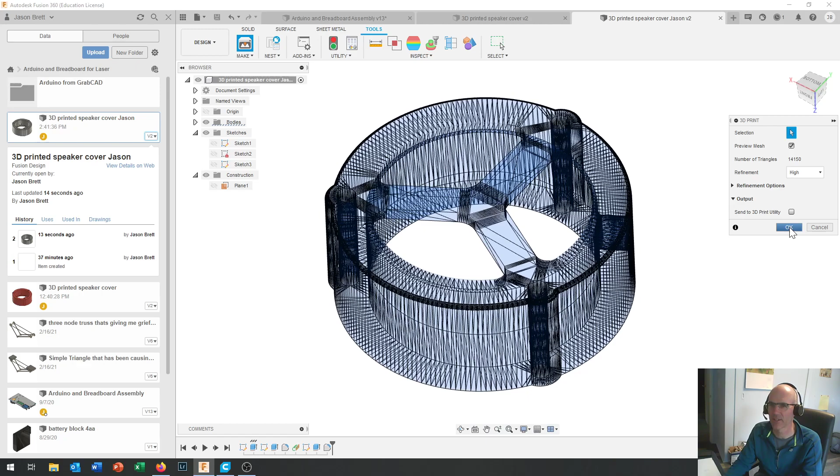Now, you might not need high refinement. You can play around with that and see what a low refinement polygon shape looks like. And sometimes that can damage your output resolution. And seeing as how we're not too worried about file size or anything like that, may as well use a high resolution. I'm going to say turn off the send to 3D print utility right there and just click on OK.

And now it's going to ask, where do you want to save that? And the desktop's a really awful place to put it. I use a few different folders, but for right now, I'm just going to throw it on my desktop. Make sure you save it in a folder that makes sense for you and give it a name that makes sense for you. So I'm going to call this Big Bad Breadboard Board, 3D printed speaker enclosure, Jason. I'm going to add my name to it just to make sure that follows it all the way through so that when we print it, we know whose file we're printing.

Okay, that's about it for Fusion. Your file is saved. You've now actually built the part. All the hard work is done. You just need to go through and generate some G code for the 3D printer so that it comes out. So if you're looking for a natural place to take a break and come back in a minute, go grab your coffee cup, your tea cup, whatever other beverage you're having, and congratulate yourself. It's a nice looking part you just made.

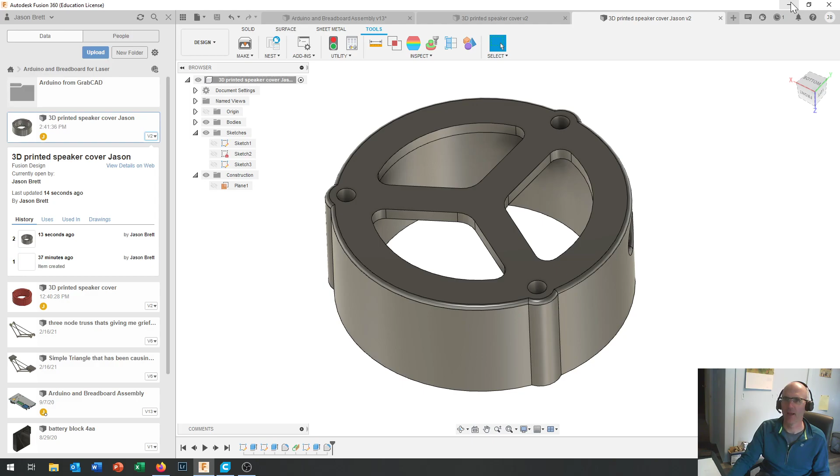Okay, I'm going to minimize this window right here, minimize this window right here, and now I've got Ultimaker Cura up and running. Now, the first time you run Cura, it doesn't know what type of printer you're going to use. It doesn't know much of anything. It's got some default settings, but you do need to come in and configure it. So you should be looking at a screen that looks something like this.

And what you need to do is you need to come in here and you need to come into your settings and you need to tell it that we're going to add a printer to the system. Okay, now you can see I've already got the Monoprice Select Mini enabled on this system. Yours won't have that enabled. We have the Monoprice Select Mini V2 E3D and ready for you to use in the electronics shop. So let's go add printer.

Okay, couldn't find anything over the network, so add a non-networked printer is what you want. There's a whole list of different 3D printers that have been configured to work with Ultimaker. Now, obviously, because Ultimaker makes their own printers, they put all their software at the top of the list. But because they're using open source components, and they have to make their file compatible with open source rules and regulations, people add in all these different plugins, and it just makes it really easy to use.

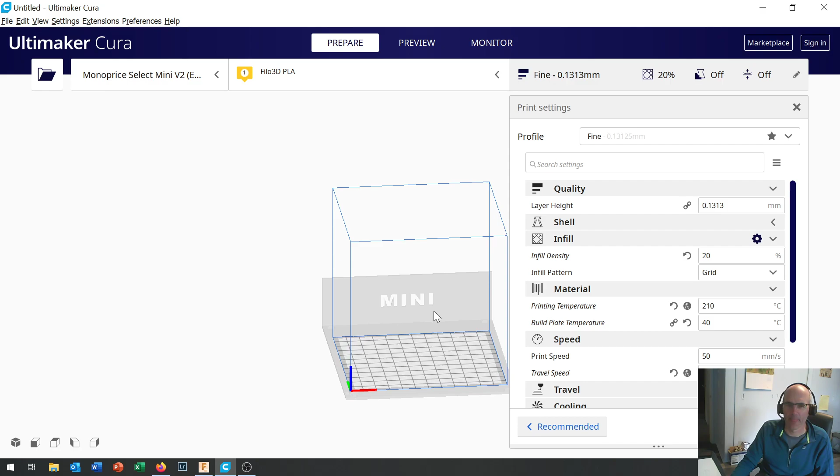Okay. Now, what we want to do is if you're looking at something that says mini, we want to bring in our part. So we're going to come in here and we're going to open a file. And on your desktop, or wherever you saved that file, I know mine ended up on the desktop, even though I hate saving things to the desktop. I'll go back and delete it later. You should see your Big Bad Breadboard 3D printed speaker enclosure, and that part's going to come in right like so.

Now, if you got lucky, it came in on the bed exactly the right way around, and it's exactly the right size. If you didn't have millimeters set as your units of reference, or if you started drawing it from a different drawing plane, it may have come in a different orientation.

So if that's the case, you have to select the object and click on rotate. And now you've got these three axes around here, and you'll be able to rotate it around. So if we wanted to print it in that orientation, we could.

But as I was saying, now as we start to print, you can see these protective covers in the middle are going to need some kind of support material down underneath them. Otherwise, they'll just be printing in thin air. So we want to make sure that we've got this sitting flat on the bed, right like so.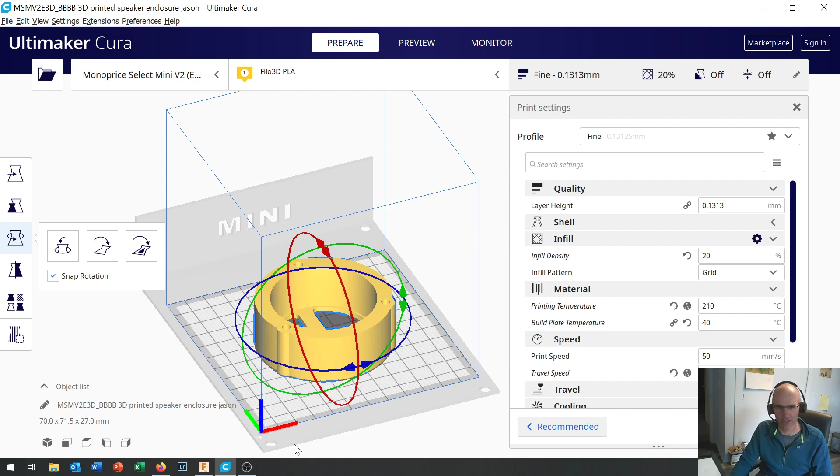Okay, if you need to scale it, if it came in the wrong size, you can come in here and typically, if something came in the wrong size, it either got printed out in centimeters, so you'd need to scale it down by 10% or up by 1,000%, or it came in inches instead of millimeters, so that's going to be 25.4 to 1, roughly, your ratio from inches to millimeters. So you can try a couple of different ratios right in there, but if everything worked out right, it should look something like this, and it should be sitting there nicely and neatly right on the print bed.

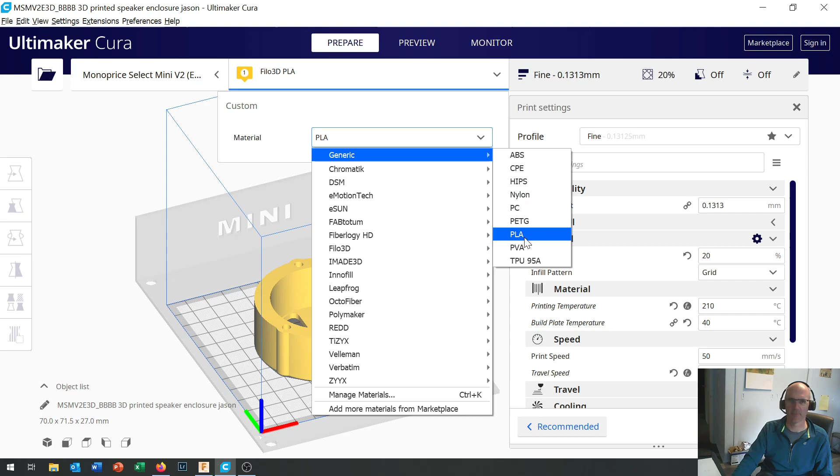Okay, now if we've got the object sitting on the print bed, we're pretty happy with that. We want to check what our material is going to be right up here. So we've got one extruder on our 3D printer, and we need to tell it what material we're using in here. And it says, well, PLA is the one that we're going to be using. Okay, and we can come in here and we can just pick generic PLA. And it will ask if you want to keep those changes.

Now, when you choose your material, some of the changes that you get in here affect the build plate temperature. That's the bed of the printer, it has a heater built into it, and it will heat that up to 60 degrees Celsius to help things stick. With our changes for generic, now mine's saying 40. If yours says anywhere from 40 to 60, you're probably doing just fine. And your print temperature, if it says anywhere from 200 to 220, you're probably doing fine. I find 40 degrees and 210 works very nice with the Monoprice minis. Okay, so I'm just going to click on keep the changes right in there.

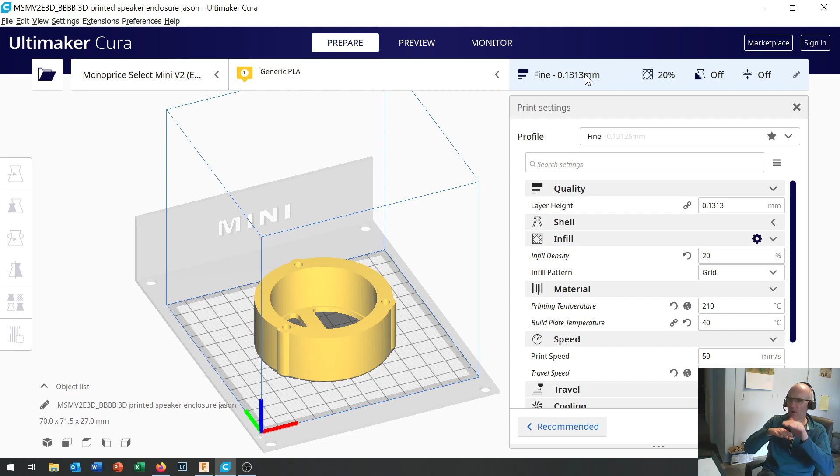Now, our print settings right in here. One of the big things when you're 3D printing is what layer height you're going to work with, because that's how high up the print head will come on each layer that you print. The finer that is, the longer your object takes to print, but the better the print quality of your wall. Typical ranges for a lot of our printers are somewhere between 0.1 millimeters, in other words 10 layers of printing per millimeter, to about 0.3 millimeters.

And they all kind of work okay. The 0.3 millimeters will print roughly 3 times faster than the 0.1 millimeter, but the 0.1 millimeter will come out looking a little bit finer. Sometimes you'll get a little bit uneven numbers in here, and that's got to do with somebody going through and calculating the very optimal layers for your particular printer.

I'm just going to come in here and see what else we have, because fine is a little bit slow. Let's take a look and see what normal does for our printer, okay? And so that changes some of our settings. Again, it says double check all of your settings right in here, and we'll say keep the changes. Okay, so now because we've changed it up, we've got all these options showing in here. So our layer height is 0.175 millimeters.

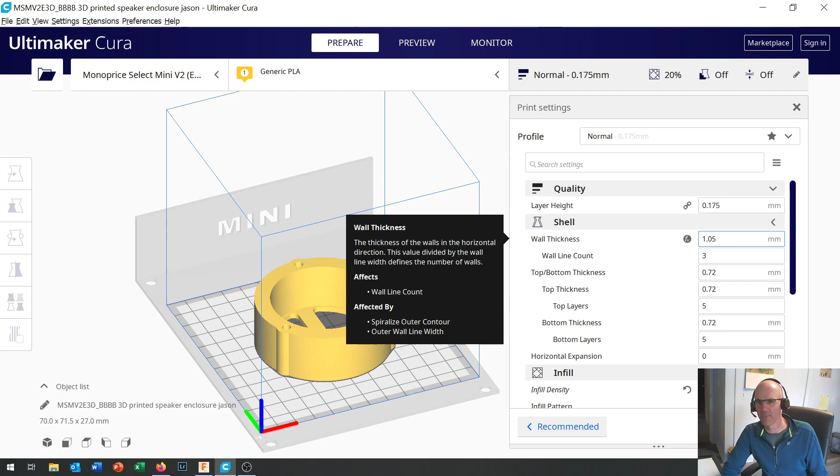Shell. Okay, if you click on the drop-down menu in here, it's going to show you some interesting things. Now, FX means that it's calculated as a function. You don't really need to worry about that right now. The wall thickness is how thick the wall is going to be. There's going to be three passes of the extruder over top. Standard extruder size is 0.4 millimeters. Top bottom thickness is going to be 0.72 millimeters, so that should all be fine.

We'll take a look at more of what that means after we slice it for the first time. Your infill density should be down around 20%, and I'll show you what infill means as we go through and do that as well. You've got different infill patterns, all sorts of different settings.

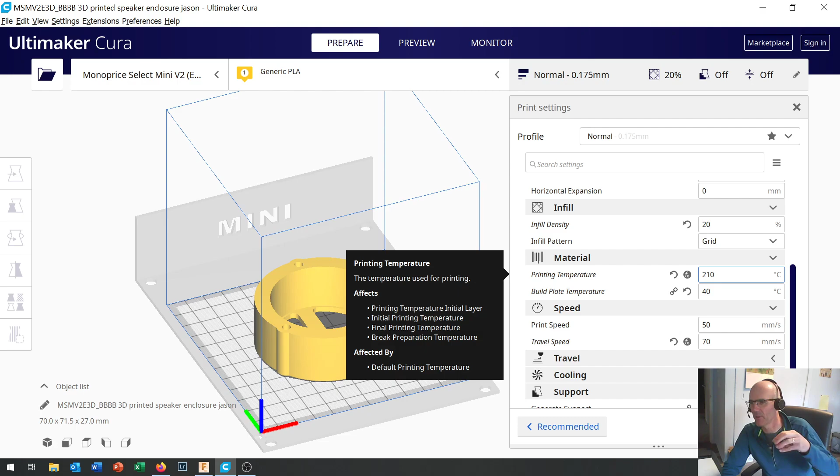Our material we've already selected. If we weren't happy with the temperatures, we could change it from 210 and 40, but 210 degrees to melt the plastic as it comes out the extruder, 40 degrees for the bed temperature so it sticks to the bed and doesn't warp off the bed.

Our print speed, this has already been selected for our printer. Yes, you can change them at your own risk. If you set them too high, then the printer can't handle that print speed, and yes it prints faster, but you get garbage. So slowing it down takes longer, but sometimes you get nicer print quality.

These are pretty optimal for the Monoprice Mini. Your travel settings - retraction means as it's extruding the plastic through there, every now and then it comes to the end of printing a line. Retraction just pulls that back a little bit, and it can enable slightly nicer print jobs.

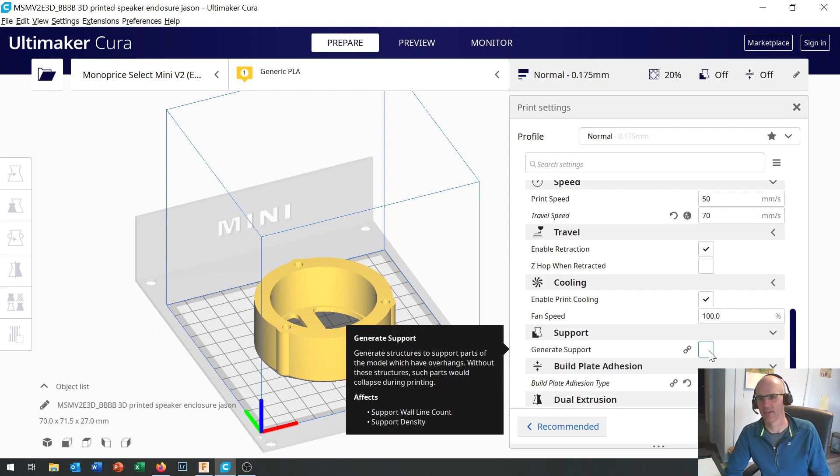Cooling, there's a fan on the print head that blows down and cools everything over top. And you heard me talking about support material earlier. I'm not going to delve into it too much right now because we don't need it in this configuration. But if we did need support material for some print or other, you could turn it on right in here. Build plate adhesion - okay, we've got a few different options: skirt, brim, raft, and none.

I'm going to leave it at skirt, and I'll show you what that means in just a moment. Dual extrusion is not an option on the Monoprice because we've only got one extruder. On the Ultimaker, you can do dual extrusion and all sorts of neat things. You can have your support material printed in one material that dissolves nicely in water, or you can do two color prints, or two different materials so that you can print a wheel and a thermoplastic rubber tire around it as well.

Well, everything's a thermoplastic in here. Okay, so there we go, we've got all of our settings tapped in there. Now, I say all of our settings, but there are quite a few more settings. If one of the settings that I adjusted doesn't come up for you on here, let's take a look at one of these where it's got a little gear icon over top of it - for instance, where's one that I like to tweak sometimes?

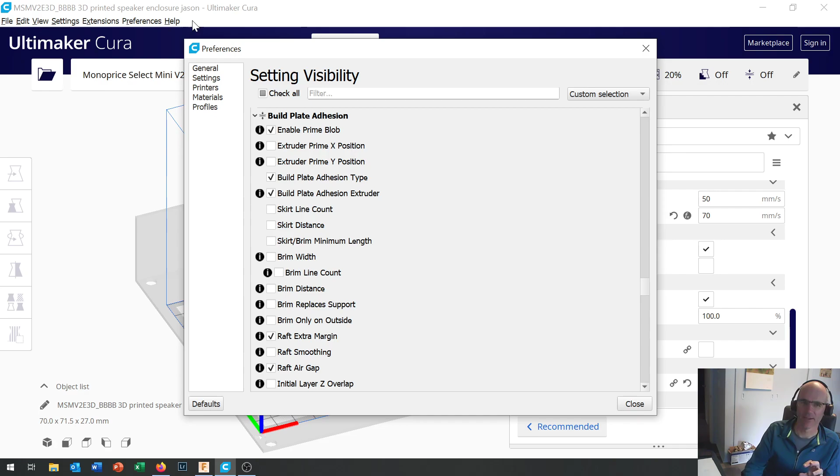Bed adhesion, or build plate adhesion. When you mouse over that, a little gear comes up. This is a simplified view of all the settings available. It shows you everything you need as a beginner, so don't panic. As you use the printers more, you can come in here and tweak all the settings for build plate adhesion, like different settings for making a raft, your brim, or your skirt. But for right now, you're probably happier if I just close that. You don't need to know anything about what those little gears do.

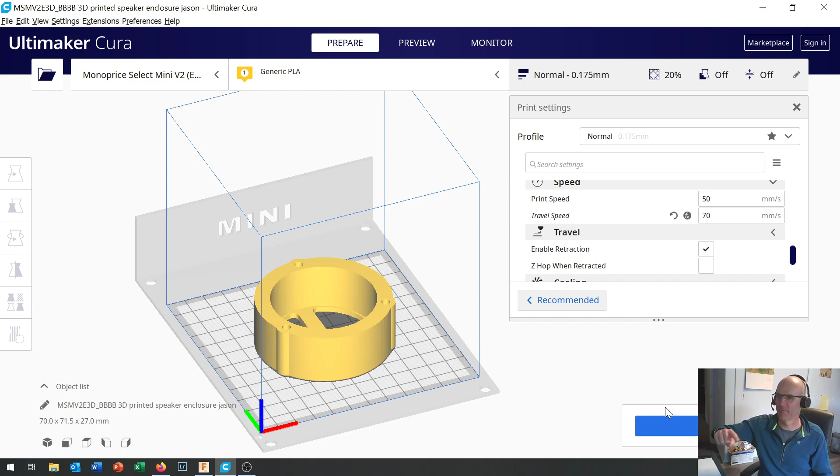Okay, good, we've got this all set up. Now we get to do the exciting thing and slice it. I'm on a lower resolution screen so my slice button is tucked away in the back. Let me grab those three dots and lift that up a bit. You should see a blue slice button sitting down here. Click on that slice button and you'll see it says slicing, and then it will finish, and you'll see a preview button. So click on your preview.

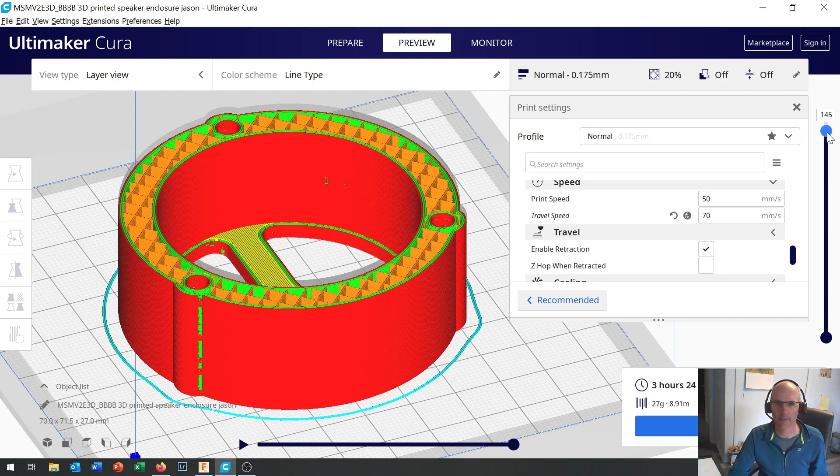Now you can zoom in a little bit. That centermost button helps for moving things around so you can take a look at how things are working. Right above me is a slider, and you can see we've got 145 layers. As I start sliding down, you can see some of the things we were talking about.

This is the finished project, and it's going to start out all the way down at the ground. This is layer one, the first layer printed. This is the skirt I was talking about. This doesn't actually help with bed adhesion — what it does is let any old material in the extruder get extruded out onto the print bed, and lets you check that everything's going to stick before you start printing your part. Then it's going to come in and start printing the walls.

You'll notice when you look around here, we gave it a wall thickness and it calculated how many passes we wanted, or we told it how many passes, and it calculated the wall thickness. You can see we've got 3 passes of the extruder going around to create our wall thickness. Once you've done those 3 passes, it starts going back and forth putting fine layers of plastic down to create a solid layer of plastic on the bottom, and that's going to stick to the bed.

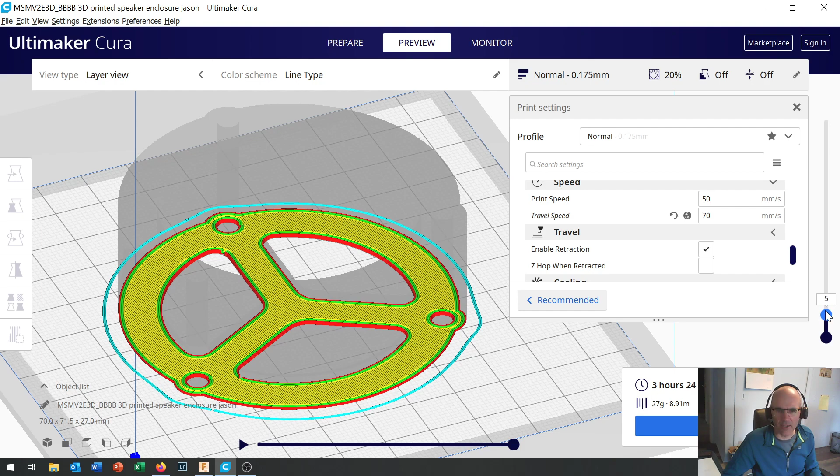You see it's figured out where the inside of the holes are — the software is just amazing. As I go up, layers 2 and 3 are also solid. As I get up to layer 5, is it solid as well? 5 looks pretty solid. Now as we get past about layer 6, that's going to eventually be our top layer, but right now it's the bottom layer because we're printing upside down to our final orientation.

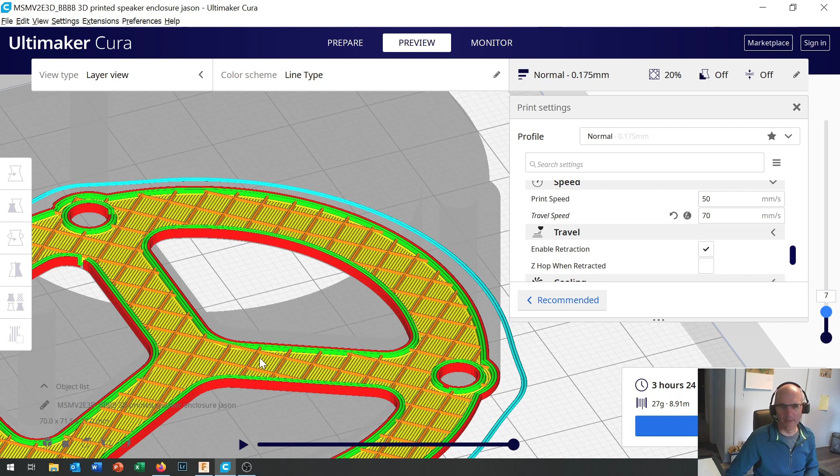Now you can see these cross hatches starting to come in here — this is our infill. When I said we wanted about 20% infill, you can see it's creating a fairly hollow shape. This is one of the neat things about 3D printed objects — they're fairly light and efficient on plastic because they tend to be hollow on the inside, in this case 80% hollow. It's pretty hard to create projects that are hollow on the inside, and it saves a lot of weight and material. So as we start coming up, it keeps building and the layers start to add on top of each other.

And then you can see we left a little lip right around on that inside of the 3mm part. So you can see that everything just went in a little bit. And now right over in this corner, now you may have your drawing rotated a different way, but somewhere when you get to about layer 22, you'll see this yellow starting to form. Well, that yellow is the bottom layer of the circle. And you can see that hole that we put in the wall is starting to form right in here, and our wall just stops right there.

And we keep going up and up and up. And now those layers start to come together. Now, because we're coming together very gently at the top and we don't have a very steep angle yet, the printer can actually do that without the plastic all falling back down underneath it. You can print slight overhangs on here. Let's see what happens as we keep going up on here.

And now we're coming in around to the top, and you can see when we get to the part where it would be super steep and go right across the top, it comes in here and it starts doing a bridging operation. It'll take a piece from this side and draw that filament right across down here. And it pulls that bridge, and instead of the plastic drooping, as it cools a little bit, the plastic tightens up and holds itself into place right there. And we can actually get pretty clean holes this way. So depending on the size of the hole, you can probably get away with something like that without support material.

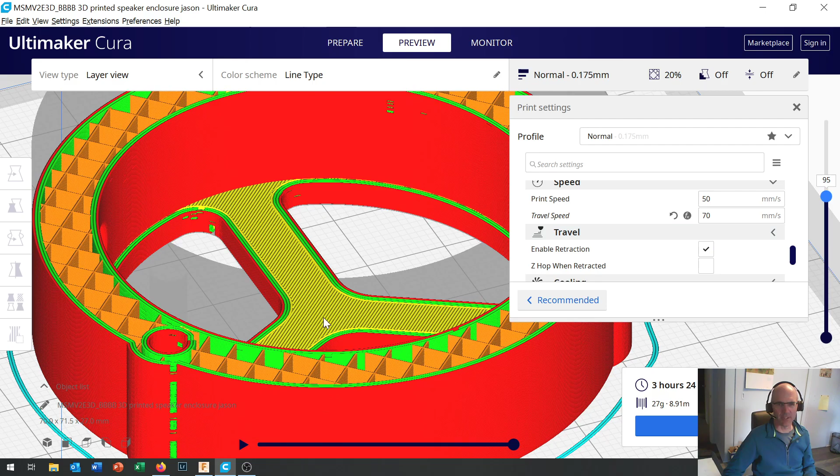Zoom out a little bit here and take a look. As you get taller and taller, you get more and more of the same until it comes up to the top, and then we get our final few layers and it seals it off, and we have a project that looks like a solid enclosed project, but in reality, as you just saw, it's about 80% empty inside. Now, very useful down here. It gives us an estimate of how long it's going to take to print the project, 3 hours and 24 minutes, and about 27 grams of material.

So there we go. That's going to create G-code for us. Now, you can click on Save to File. Okay, and this is why I was putting my name and everything. It saves it right on there. Save it to your disk, and you can put it on a flash drive and bring it into work. Or if it's on your laptop, bring your laptop into work. We actually transfer the files to our 3D printers using Wi-Fi. That's a process that I can show you once you've got a file to transfer. Remember that it's the G-code file that we want.

This G-code, you can actually go in and look at it using the same G-code editor that you've been using in your G-code class, where you've been learning to manually write G-code. And it's got all of the same commands in there, G0, G1. It's got the X and Y coordinates. You'll see a few different things for temperature and for extrusion speed in this G-code because of course we've got the 3D printer and it needs some temperatures and some extrusion rates, which you don't have in a CNC router. But it's just G-code, just a lot of lines of it, all automatically generated to do that for you. You can picture how hard that would be to do if you were doing that by hand. So save your G-code, and then you can bring it into work and print it out.